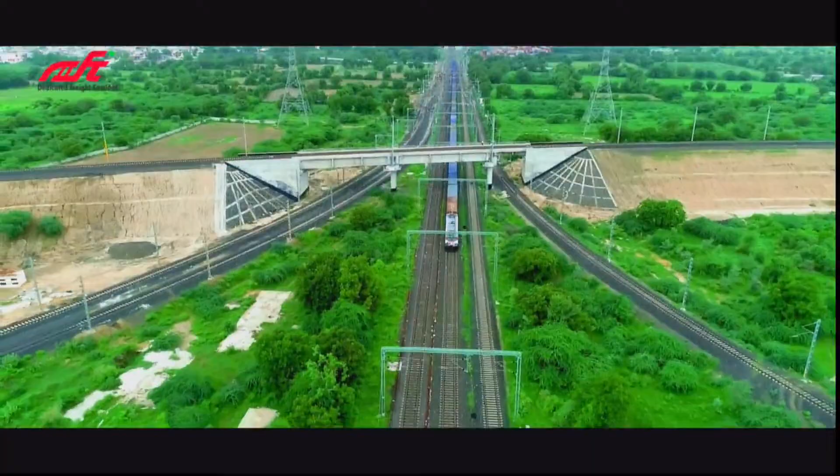For decades, India faced a tough choice: prioritize passenger trains or freight. With both sharing the same tracks, delays were inevitable, costs surged, and efficiency suffered, even though freight trains generated 67% of railway revenue while passenger trains accounted for just 33%. The Dedicated Freight Corridor is the answer.

Spanning 3,000 kilometers, it's designed for long, heavy haul trains, boosting capacity and slashing turnaround times. A first for Indian Railways on a fully electrified network, with double stack trains for higher loads and long haul trains carrying over 100 wagons, 10,000 tons in one trip. Efficiency reaches new heights. The Dedicated Freight Corridor is one of the iconic projects conceived post-independence.

The Western Dedicated Freight Corridor starts from Dadri and runs right up to JNPT. The Eastern Dedicated Freight Corridor starts from Ludhiana and goes right up to Sonnagar. After the commissioning of the whole section, that is 100% commissioning, our potential, our total utilization of this dedicated freight corridor will reach its maximum.

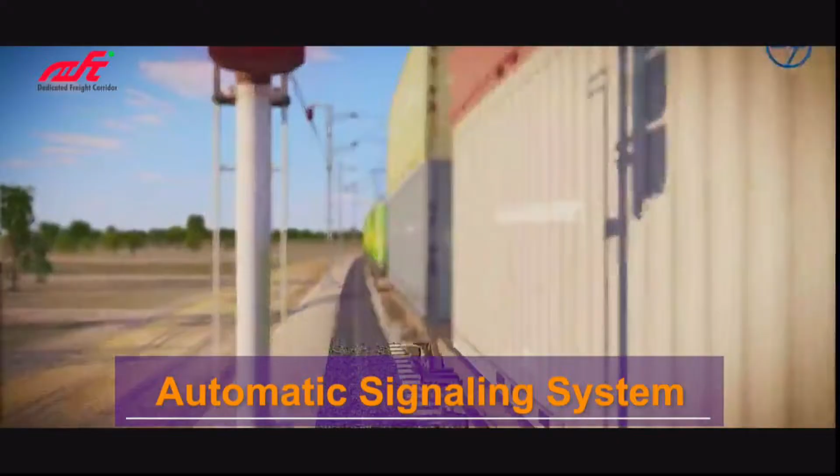High-speed, high-volume freight demands smarter maintenance. Instead of reacting to failures, DFCCIL predicts them using trackside sensors, AI analytics and real-time monitoring to keep the corridor safe, sustainable and reliable. An automatic signaling system optimizes train flow, while the 2x25 kilovolt power system supports heavier loads. Wheel impact load detectors spot faulty wheels early, preventing rail damage and ensuring smooth operations.

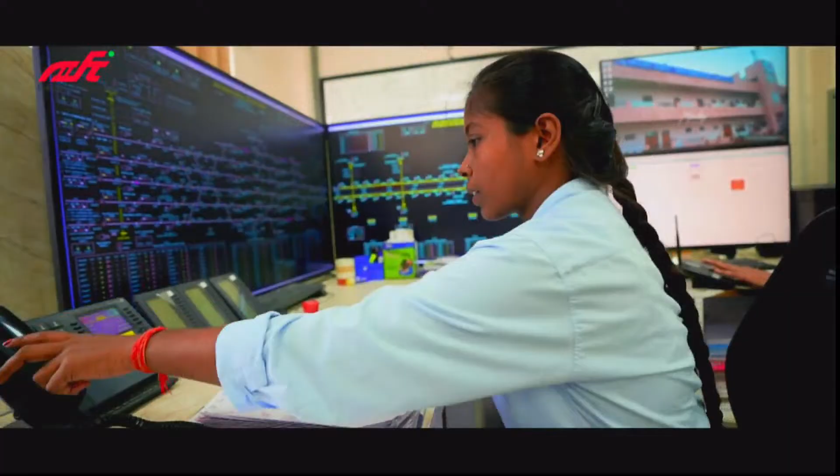Smart features include load, vibration and temperature sensors to detect rail stress, and acoustic sensors that hear faults before they are visible. AI models analyze data in real time, sending precise alerts to crews. DFCCIL's tech-driven approach includes hot box detectors to prevent axle failures, machine vision systems for automated defect detection, and automatic fault locators for quick repairs in overhead equipment.

Track recording cars use sensors to inspect tracks, instantly spotting wear, misalignment, or irregularities. This data keeps the track in perfect shape, ensuring safety and efficiency.

The Dedicated Freight Corridor is more than structure and speed. It's the backbone of India's economic growth. By connecting industries, empowering businesses, and moving the nation forward, DFCCIL is not just building tracks, it's building the future. As India strides towards Viksit Bharat 2047, the dedicated freight corridor stands as a testament to our ambition, strong, smart, and unstoppable. The journey has begun. The destination, a brighter, bolder India.

Absolutely wonderful.

After that amazing video, ladies and gentlemen, we'll quickly dive into the proceedings of the first technical session for today on the topic of Built to Last: Interface Design, Precision Welding and Fleet Intelligence. This session will spotlight innovations at the rail sleeper interface, the role of precision welding, and the engineering intelligence that supports long-term durability in heavy haul environments.

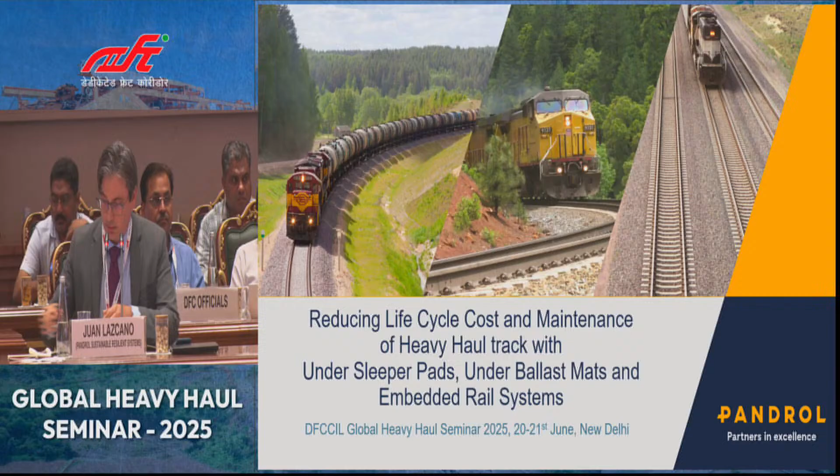So I'm coming here as Pandrol, where you can see we are a global company. We are partnered with main networks around the world. To summarize our vision, our aspiration is to contribute to the main objectives of networks around the world, looking at availability, safety, and being more than a supplier, an engineering partner. Our presence allows us, in the end, to share experience globally. When we look at Pandrol, we have several core businesses focused on fastenings and weldings, but there is this knowledge built around the track that also has branches leading to the specific systems we are going to discuss today, focused on track resilience.

One of the associated divisions that I'm personally more involved in at Pandrol is everything around track resilience. We believe that more and more, track resilience is a way to reduce life cycle cost and prolong the life of the track. This knowledge, built up through Pandrol's work in track, fastenings, weldings, and the return from our valued customers, brings specific know-how in seeing the track as a whole. It's crucial in track design not to look at just one side of the story, but to understand how all the components are interacting. This is what we can share with confidence, and we believe it is the value of our company.

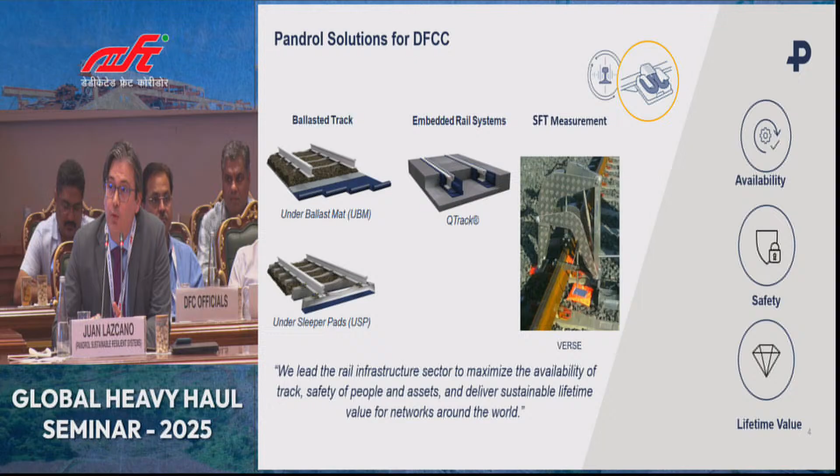Again, the keywords are going to be resilience, track design, and optimizing the track stiffness in a way that really reduces the life cycle cost.

So the first stop is under sleeper pads, which the best way to show it is graphically. What is the concept here? We are looking at basically placing an elastic element under the sleeper. This additional layer of resilience is going to be key for performance.

There is one root cause for many of the fantastic discussions we are having here today, which is that we are talking about track infrastructure getting hit by huge dynamic loading. These forces are affecting, degrading, and impacting all the elements of the track. So this is the core issue.

This is something that when you place this elastic element, you are directly influencing positively the load distribution. Again, when we think about the 400 kilonewton load axle, without USP, what happens when the rail impacts - you can see this graphically - the load distribution is really focused on a reduced number of sleepers. So you have a very high impact.

Impact on, let's say, 1, 2, 3 sleepers. When you actually increase the resilience, this load distribution enhances, and that peak stress that the rail seat is suffering gets really relieved and better distributed. Only that principle marks a huge difference that we need to take into account.

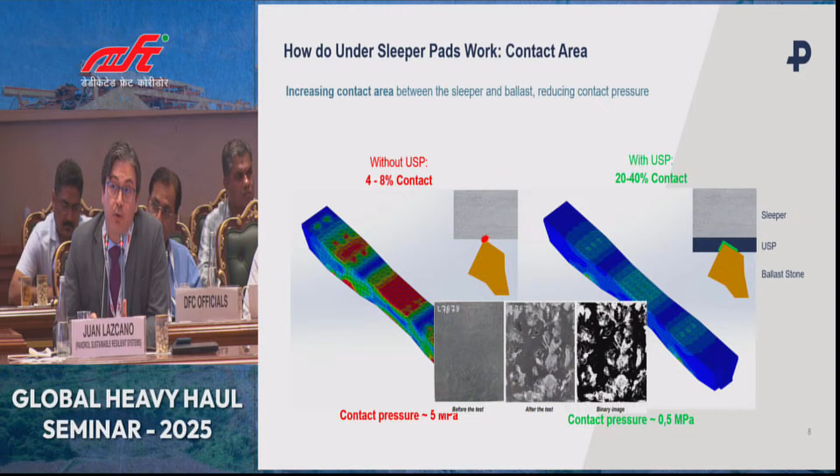But overall there is an agreement of a 20 to 40% contact area in many cases, depending also on the stiffness and elasticity of the USP.

Let's go quickly to the main benefits. When we look at under sleeper pads and a resilient element, it's going to help in the reduction of maintenance. Being an elastic element, it can help in very critical areas like bridges or tunnels, where there is a need to reduce the ballast layer thickness - it can be a way to compensate and really control the overall track stiffness.

By substituting this ballast, which is, let's remember, also an elastic element of the track. Transitions on design we'll take a look at later, and noise and vibration attenuation is also possible in heavy haul when you are nearby urban areas. It's also a need - maybe not primarily, but for critical sections - something to take into consideration.

At the end, these technologies, let's say they are relatively new in railway terms - 25, 30 years, so relatively new. A railway is a world of facts, accumulation, proven track records, but it's also already, after 30 years of the first references, which in our case were in Austria and elsewhere, there is a state-of-the-art position and very well-developed norms and case studies with specialist companies like we are present here today.

There is a foundation of everything that we do, which is a fantastic report from the International Union of Railways on USP, that after several test tracks, established the framework of the first positive values and benefits. These numbers you see are coming from that report.

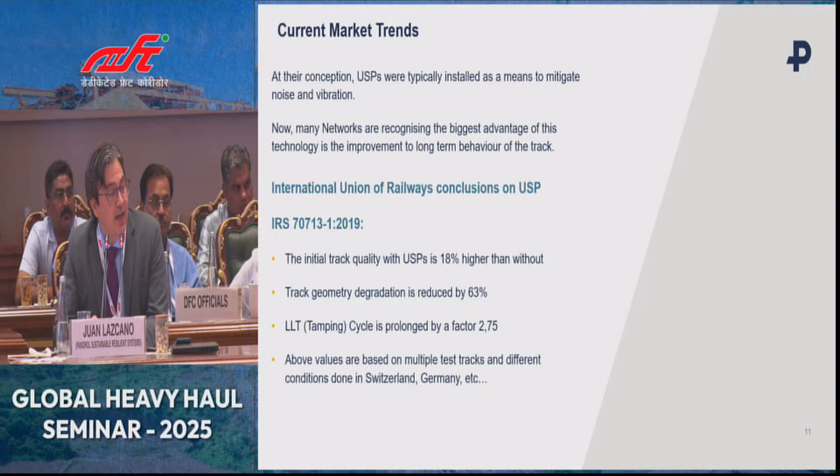In terms of reduction of tamping, track geometry degradation, and track quality overall, it's difficult to summarize and put values because this is very network-specific experience. Case studies are much more interesting, and it's not about fixing one number. It's about understanding every track and network needs to define the right USP.

That's the best approach. One of the foundation stones was this SBB Switzerland case, where the challenge was to find the right stiffness for the needs of the network. This is where you can see the difference between using USP, in this case an intermediate stiffness, versus sections without USP, and the increase in track settlement.

We have networks like in the case of Belgium that have been using this technology for 30 years now. It's recurrent - not just for critical sections, they use it recurrently because they see an accumulated benefit in maintenance reduction.

And also a positive impact on corrugation. The most valuable data is always with the networks, and this is where we want to always be close to learn - that's the best empirical way to approach this technology. The cases we are going to see are Belgium, Sweden, and US. Every pain point of the network can be addressed by having this overall view on the track.

Our approach from Pandrol is stiffness in the fastenings, what happens in the welding, and below the under-sleeper pad. We see the track as a whole.

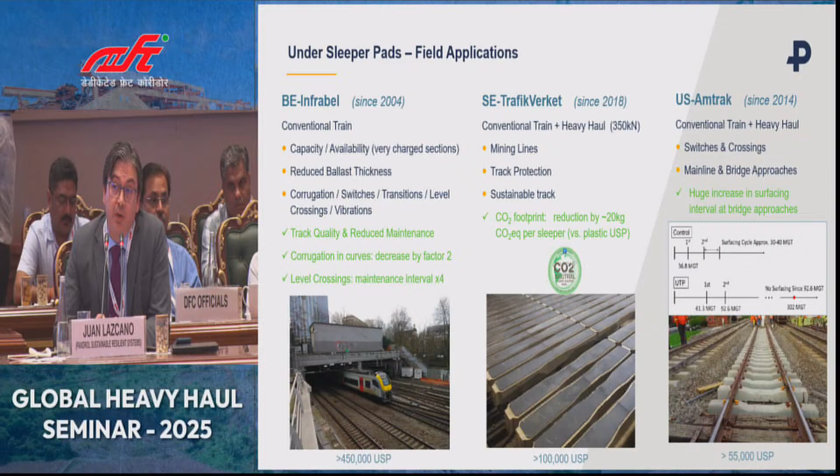In the case of Amtrak, in some critical areas, they saw a fantastic factor 6 reduction in tamping. And today, I think in the US, they are by far the most adopting - they are the pioneers of adopting this technology.

Australia's cases focus on ballast protection and the transition stiffness problem they have on bridges. There is one case in Brazil also, which we know is clear from IHHA - that the freight operations in Brazil, MRS, Rumo and Vale, have really been pioneers of this adoption for heavy haul, and it's one of the best references this technology can have.

Today, the state of the market is telling us quite clearly that the market is demanding track experts who are capable of understanding sustainability of the track - in the sense of prolonging the lifetime, and in the sense of being as green as possible.

But again, after 30 years, there are some initial conclusions. It's widely recognized by the International Union of Railways and the European norm for under-sleeper pads that there are several elastomers that can be used.

Today we see a trend that is mostly focusing on the best performing materials, which are typically the polyurethane and rubber-based solutions. In our case, we also use rubber for our technology.

This is a way to achieve the purpose of the elastomer, which has to be - and it's especially important for heavy haul - proven resistant. It really has to have an excellent performance in fatigue. So this is one of the reasons we are using this material. But again, it's about the system and the knowledge.

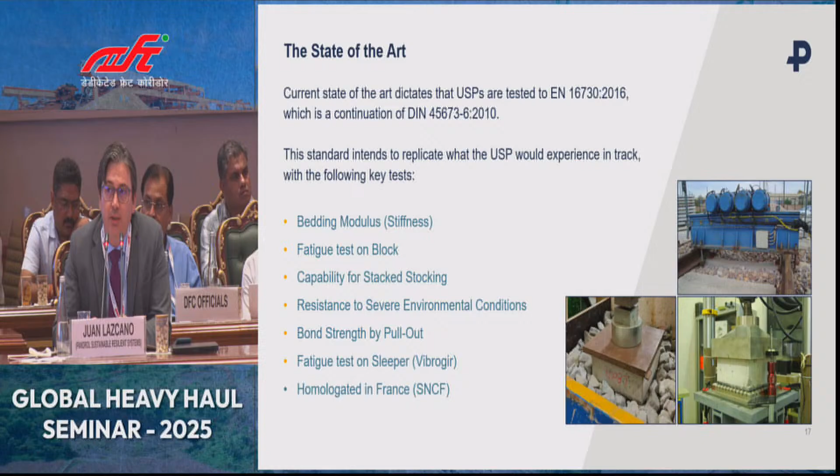But at the end of the day, if I need to choose one, I will always focus on one specific test for fatigue and durability, which is the one we needed to pass to get homologation in SNCF in France, the Vibrogir. Why do we always recommend this testing? Because it's the most conclusive and powerful way to simulate the torture, because I don't have any other word, that this under-sleeper pad is going to suffer during its lifetime.

This particular test, developed by SNCF and now accommodated in the EN standard, is a must for adoption, to be sure this system is going to pass the test of time. The result you see there is basically the setup, the sleeper equipped with the Vibrogir. The idea is to simulate up to 1,000 mega gross tons and see the variations, both physical and in terms of stiffness, to see how the material gives performance throughout its lifetime.

A very quick point on some investigations we are leading today. The group of engineers at Pandrol is also part of the CEN committee, in charge of redacting, updating and taking care of the EN standard. It's formed by specialized engineering companies and suppliers, and also the European networks are present there.

One of the challenges we see today, and I think this is a general problem, is we need to simplify reality in labs to understand how the system works, but sometimes we need to keep a good push to make sure the conditions of the lab are representative of what happens in the track.

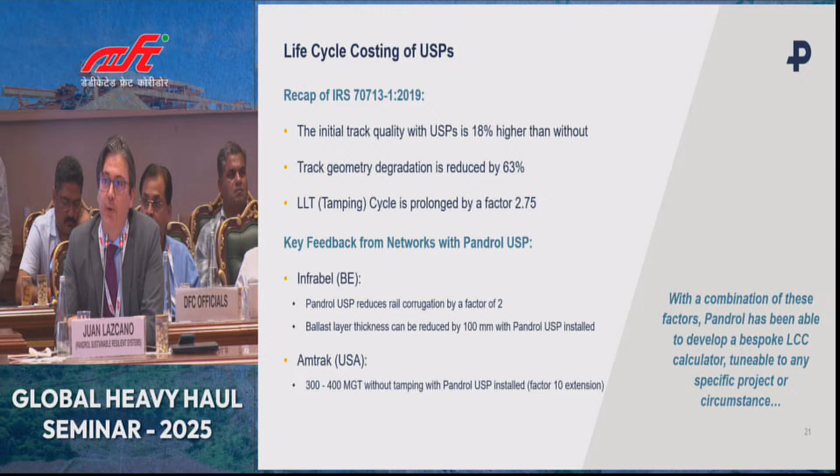Brief recap until now: again, 30 years of technology, a well-proven track record, different solutions, International Union of Railways Foundation, and a leading norm, the European norm, and very good feedback from customers around the world.

Today we are also trying to develop a different approach with some of our customers, where we really need to think like an asset manager. For that, briefly, there is this tool that we can also sit down with our customers to bespoke, and understand, after defining a USP, what is going to be the impact in the long term and the return on investment of introducing damping and savings in the long run. Again, this is a sophistication, but it's needed because today we are moving to smart asset management, and this is a technology that can contribute.

Essentially today I am taking your time to talk about resilience, track resilience. Track resilience means more longevity. In this sense, with a very similar working principle but different application, is the under-ballast mat, which in this case is going to increase the elasticity of the track. Of course, logically, again we are in track resilience with a better distribution of forces.

It's also going to help the overall substructure and structure of the track, but in this case by placing the mats below the ballast. This track protection is different, and we recommend it probably for cases more linked with transitions, noise and vibration, because it's more cost effective and can also be combined with USP.

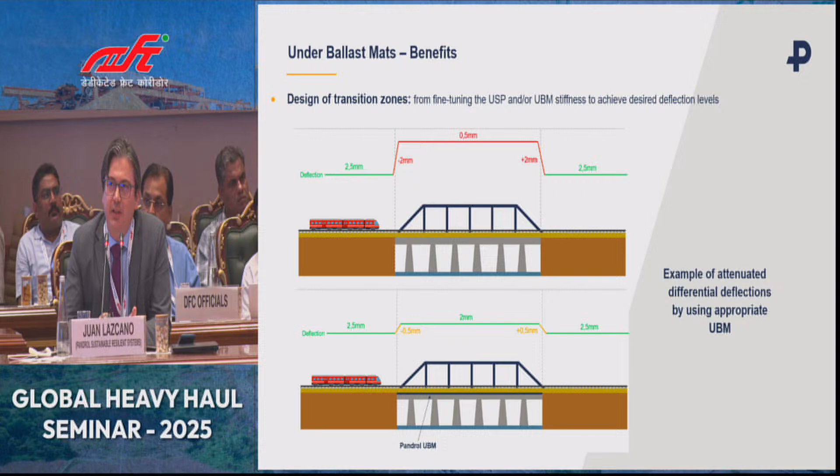A side benefit also linked with elasticity is noise and vibration, and essentially an under ballast mat is going to decouple the ballasted track from the surroundings. There are many cases where, by the expansion of networks, residential areas, hospitals, universities are very close to the track, and this ground-borne vibration needs to be tackled. So the most effective way is to place an under ballast mat and keep the structure isolated.

Different networks speak for this technology, and they use it for track protection, reduced ballast thickness, the case of Belgium. More heavy haul relevant will be the case of Etihad Rail in Emirates, where for more than 10 years now, they use it recurrently for ballast and substructure protection and track quality improvement overall. Also in Spain, there's a very typical combination of under ballast mat for high speed when it comes to tunnels and when entering urban areas, especially on the high speed connection. It's a very typical approach that their engineering team prescribes normally.

This last part is not so obvious at the beginning when we look at ERS for heavy haul, but it's something we see as a market trend growing more and more for the slab track parts. We need to look at some parts of the application here.

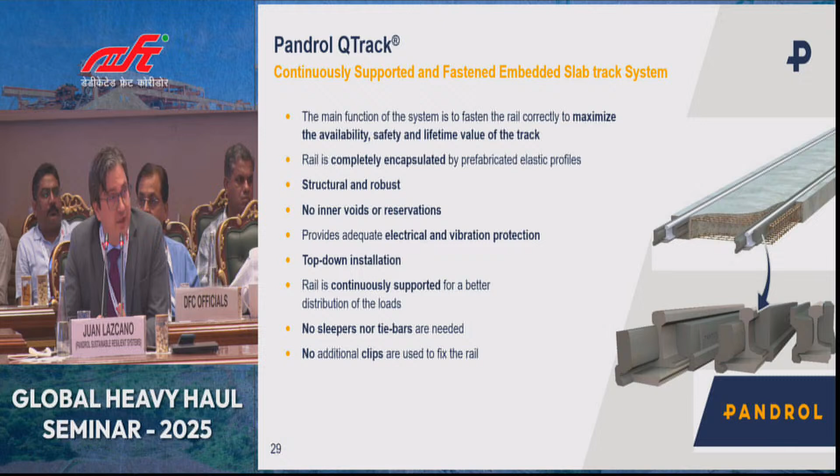For some critical sections, and we will see examples in a second, it has been proven as a fantastic choice. At the end, the concept is clear: you are going to encapsulate the rail. There are no sleepers or tie-bars. This whole setup is in itself a fastening system and is tested according to a fastening system.

The technical advantage here when it comes to track quality is quite simple. Versus a discrete resilient support, you develop a continuous resilient support. So as you can see, this differential deflection does not exist. The slab track is built to last. The whole idea and the whole point of this ERS is to get it maintenance-free.

Because the elastic rail deflection does not happen, the track is controlled longitudinally, vertically, and laterally. By doing that, again, we are looking here at specific critical areas. Even in the case of breaking, which is logically very rare, that continuous loading, that anchor is going to reduce even the gaps.

I'll give you an example. When this system was installed in Portugal, in Lisbon, even when there was a couple of rail breaks, it was so minimal that the train was still in operation. This is always due to the continuous control and the absence of differential deflection in the rail. This elastic deflection doesn't happen.

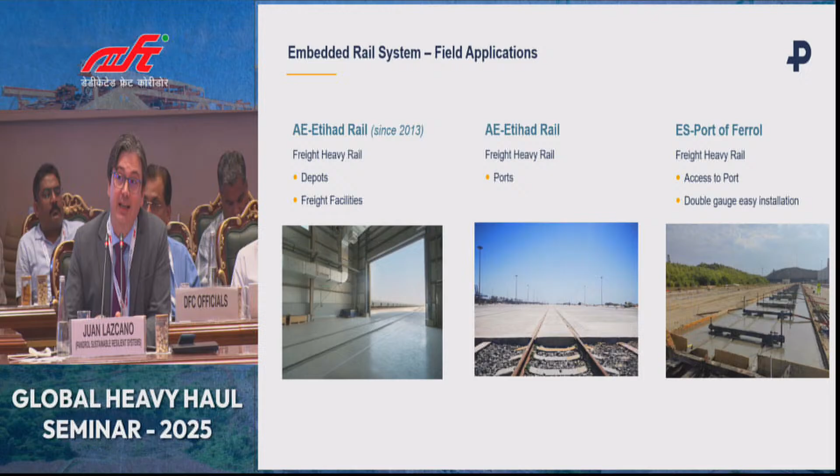As you can see, fields of application are going to be depots, freight facilities. To recap: we're talking about freight heavy haul in depots, in freight facilities, and very interesting, I think very relevant, for intermodal ports, we see more and more that rail connection is going with embedded rail. Again, it's clean, it's maintenance-free, and it allows machines and operations.

Almost right on time. I almost made it. I'm proud of myself, almost.

So, conclusions. USP, UBM, and ERS are focused on track quality. Resilience is the key. These systems have to resist the pass of time, and they are enabling freight and heavy haul today to maintain their targets in terms of availability, safety, and overall track quality. This is our value proposition. This is the experience we can share.

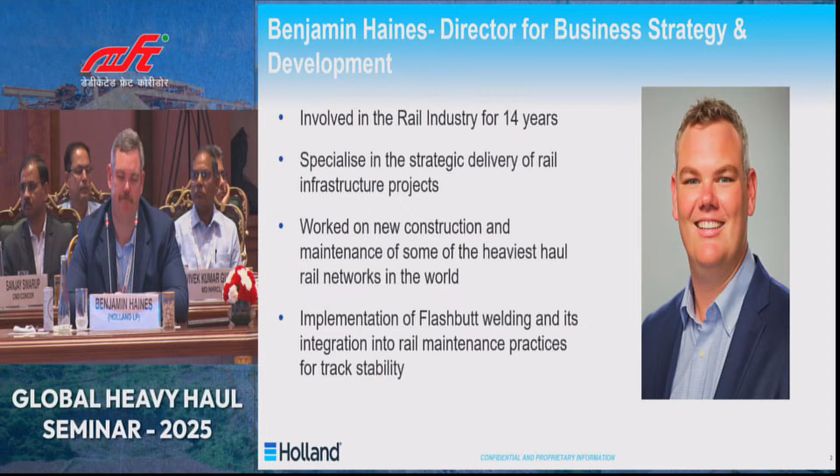So who are we as Holland? We are a rail technology and manufacturing company that delivers multidisciplinary contracting services. With over 50 years of experience in delivering flash butt welding services, we have the largest mobile fleet of flash butt welders in the world. We also design, build, refurbish and operate fixed welding facilities and their infrastructure for a number of our clients around the world.

As a rail technology company, we also have other divisions within our business, including our RMSS division, which has over 30 years of track geometry experience, utilising such equipment as our portable system, Argus 2.0, which you'll see in the photo, our UGMS locomotive mounted system, and also our specialist testing vehicles and products. In the last couple of years, we've been very happy to introduce what we call the HAMMER system, the Holland Automated Manganese Repair System, designed to repair manganese componentry and rail crossings.

In terms of a global footprint, our business has over 900 team members, all acting towards the same goal, to listen to our customers. As I mentioned, we have the largest global fleet of over 180 mobile welders, of which 3 are battery powered. It's a really exciting technology for us and goes into our core value of innovation, where we're looking for a more pure source of power that allows us to have greater finite control of weld inputs.

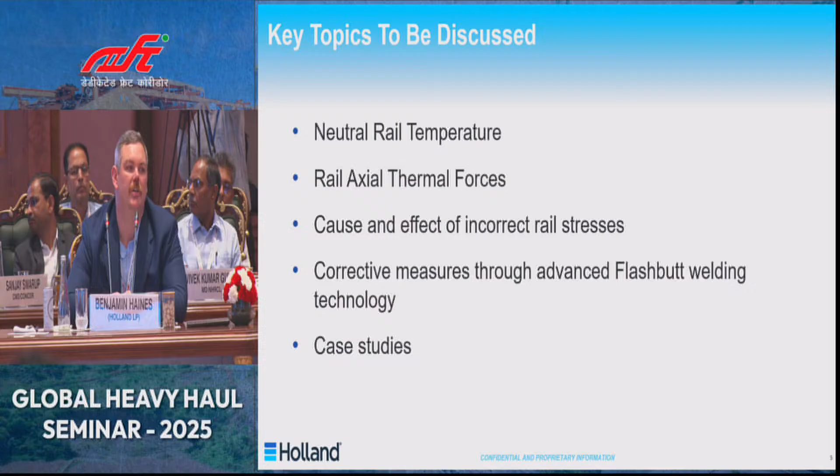So, neutral rail temperature. The neutral rail temperature serves as the baseline reference for managing axial thermal forces. It is a functional benchmark defined by design and altered through rail maintenance. It indicates the temperature at which a rail segment is free from internal longitudinal stresses. At its core, at NRT, the rail is in an equilibrium state, neither under compression nor tension.

It's important to note that rail temperature must be recorded using reliable methods, such as calibrated magnetised temperature gauges, and taken on the shaded side of the rail. So, understanding rail axial thermal forces in continuously welded rail.

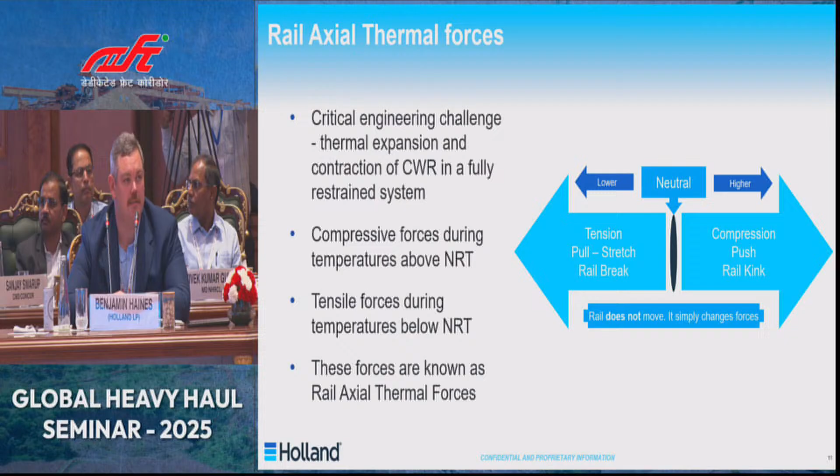This can result in a very large magnitude of rail axial thermal forces generated due to extreme lengths of the CWR, but also the rail stiffness itself. Merely a few degrees Celsius can generate tons of longitudinal force in any particular rail segment.

These forces don't just dissipate over time. They remain stored until released through physical intervention, such as cutting, de-stressing, and correct welding.

Cause and effect of incorrect rail stresses: the failure to establish and preserve the correct rail NRT can compromise the ultimate integrity of the CWR. This in turn leads to long-term operational hazards.

A big cause of this is welding and rail replacement activities often performed at incorrect rail temperatures, whereby the incorrect equipment is used that doesn't have the ability to apply a mechanical adjustment. An example of this would be closure welding significantly below the NRT.

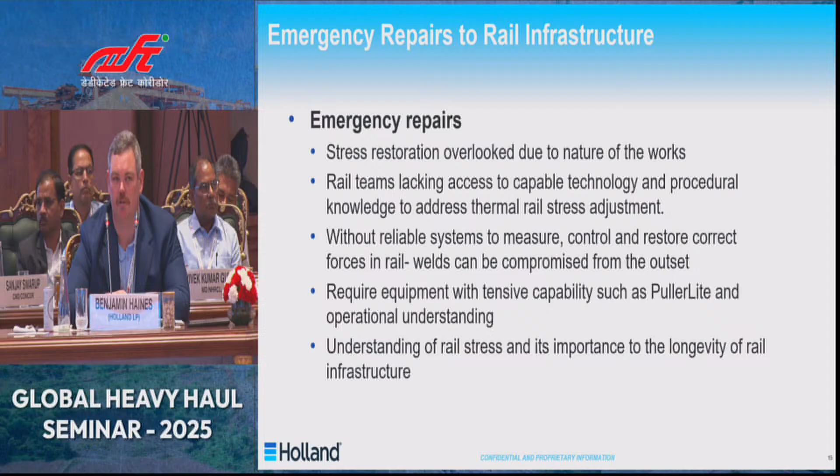We must also understand rail stress, and its importance in the longevity of rail infrastructure. Rail stress adjustment campaigns are another time where rail stresses can unfortunately not be corrected. It is important that correct procedures are used to adjust the rail to the desired NRT, and that rail infrastructure managers clearly indicate how they wish to manage this.

Approved methods must be verifiable, including with intelligent technology such as Holland's IntelliWeld system. Confirmation of equalisation of rail stresses throughout a rail module is imperative to know that the works being done restore thermal stresses to where they need to be.

Once again, correct equipment with repeatability and transparent reporting is of the utmost importance. You can see a picture of some of our technology, the PullerLite, whereby we're measuring the rail gap and also using a reference point system to measure post-tension.

Now, something that's often forgotten is weld quality when it comes to stress management. Weld quality is vital to the effectiveness of rail stress restoration. A closure weld must be able to withstand the full magnitude of longitudinal forces that are applied. Failure to replicate the mechanical strength and ductility of the parent rail results in the first point of failure under thermal forces. If we think about CWR, welds are often the weakest part of the rail, and there are a number of welds within any network.

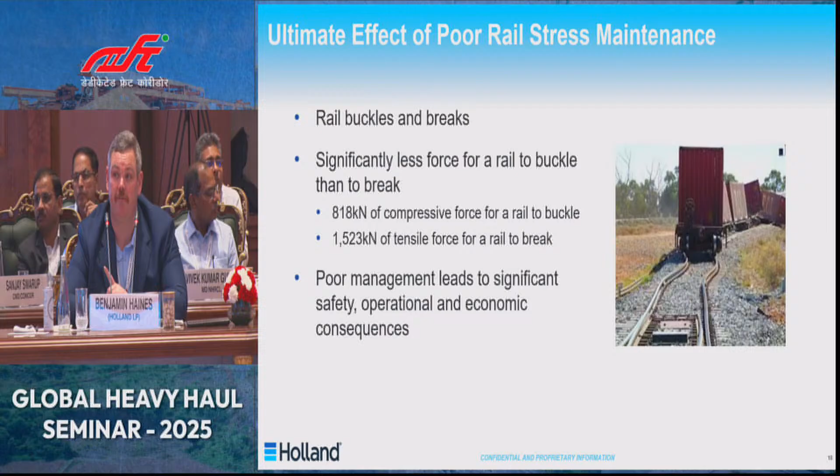Now, of note, from studies that we've conducted, it takes significantly less force for a rail to buckle than to break, with approximately 818 kilonewtons of compressive force for a rail to buckle versus, say, 1,523 kilonewtons of tensile force for a rail to break. This, of course, has a number of other determining factors in regard to the rail infrastructure itself, such as ballast quality, sleeper selection, and any other forces in play. But ultimately, poor management leads to significant safety, operational, and economic consequences.

So corrective measures through advanced flash butt welding technology. And it's important to note that this has come about through direct partnerships with our customers. Ultimately, Holland sets the benchmark in rail stress management.

Through purpose-built equipment, two key parts of our equipment is the IntelliWeld operating system, which we originally designed in 2015, and then once again improved in 2018, and so we're now running the 2.0 system, and the PullerLite. So the IntelliWeld system is that silver box that you can see in the top picture, and the PullerLite is that yellow frame. When we design this, it's about ensuring that we design the correct equipment that has the capability and functionality to perform both under new and existing operational procedures throughout anywhere in the world.

A core design philosophy for us is stress transparency, weld integrity, and operational flexibility. What is also important is taking our knowledge of over 50 years of welding and applying that training and understanding of the equipment and the methodologies.

I often use an example that there is no point in buying a Ferrari if you're not going to use it like a Ferrari. Ultimately, if you're just going down to the shops and not going to put the foot down, you might as well buy a cheaper option.

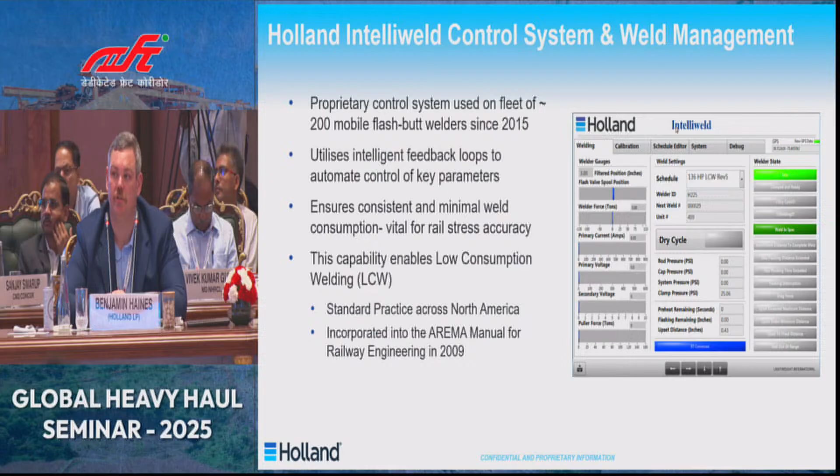Now, low consumption welding was brought about by working with our customers, and it is a strategic advantage for in-track closure welding. It applies a different philosophy in terms of rail stresses. Rather than going back to a stress to a desired NRT, we can take a principle whereby we at least want to ensure that we maintain a tensile state in the rail.

When paired with the PullerLite, it enables full restoration of rail stress, but also eliminates the need to unfasten unnecessary long lengths of rail due to its minimum consumption. This in turn reduces altering rail stresses outside of the weld zone and surrounding work activities. Our goal and objective is to reduce the amount that we interfere with the existing rail infrastructure. Ultimately, this disruption to rail infrastructure also reduces the total workforce exposure, providing a safer weld for our crews.

Now, it's a transparent system that delivers intelligent verification as well. Weld certificates for verification of the welding inputs are produced automatically for every weld. But what we do is we separate the weld graphs from the tensioning system as well, so two separate graphs are done. What this allows is our customers to clearly visualise the tensioning that was used during the

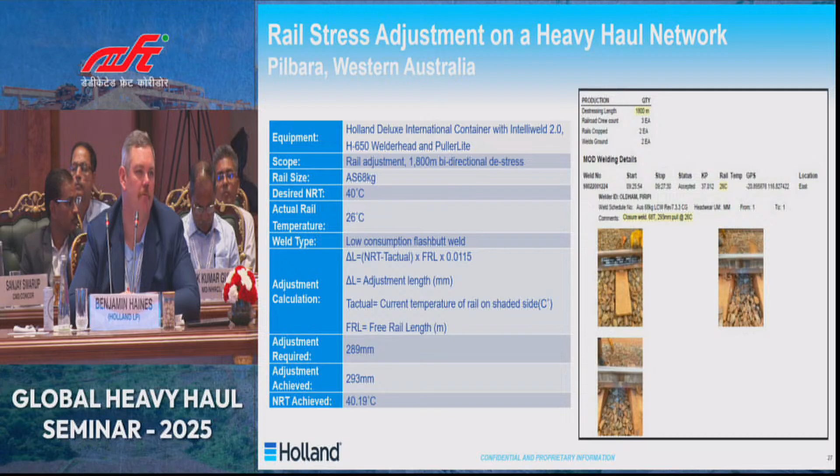So I want to leave with this. We are a rail technology company that is a supplier to you. Our objective is to understand what your problems are and design things that can solve those problems. We look forward to understanding about the Indian Railways and how we can further provide our assistance that sees mutually beneficial outcomes.

I encourage any questions. I certainly hope I can answer them, but if not, I will refer to our team in the States. And whether there be questions about flash butt welding or the cricket, I welcome the whole lot. Thank you very much for having me.

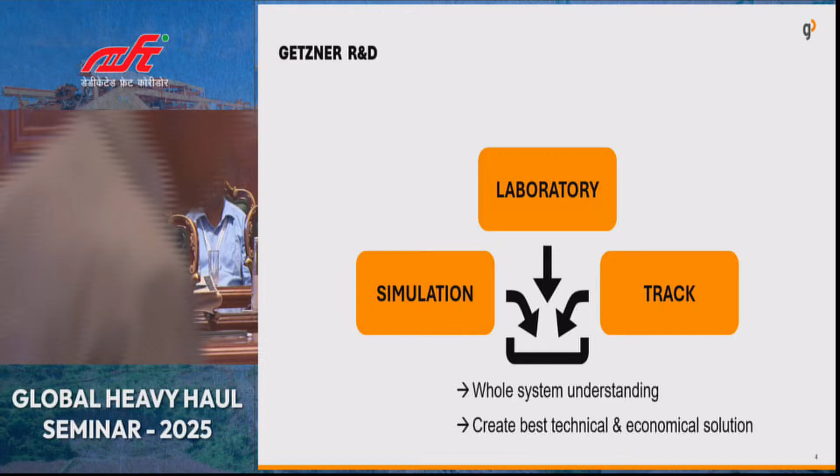As I said, we are not only a component manufacturer, we are a solution provider, and therefore we have a lot of R&D going on at Getzner. We have three areas in the R&D department. We are able to run simulations, mainly finite element analysis and multi-body simulations. We carry out all of these in-house, but we also have external partners when needed. We have our own laboratory where we carry out fatigue tests and everything required by the standards in-house. We are also able to instrument the track when required by a customer, with experts who work with pressure sensors, strain gauges, and other instrumentation equipment to verify the performance of our products on the track. So that's the Getzner R&D framework.

So today we are talking mainly about heavy haul, and heavy haul lines have very special requirements because this is a very special environment. According to the International Heavy Haul Association, we have three criteria: companies which operate regularly trains with axle loads higher than 25 tons per axle, trains with masses greater than 5,000 tons, and annual transportation over 20 MGTs. If you meet two of those three criteria, that means you are a heavy haul operator.

This special environment, with such high loads, high axle load, and longer trains, ultimately results in higher stress to the track. As an operator and infrastructure manager, what you want from the track is higher availability, less downtime, and of course, safety.

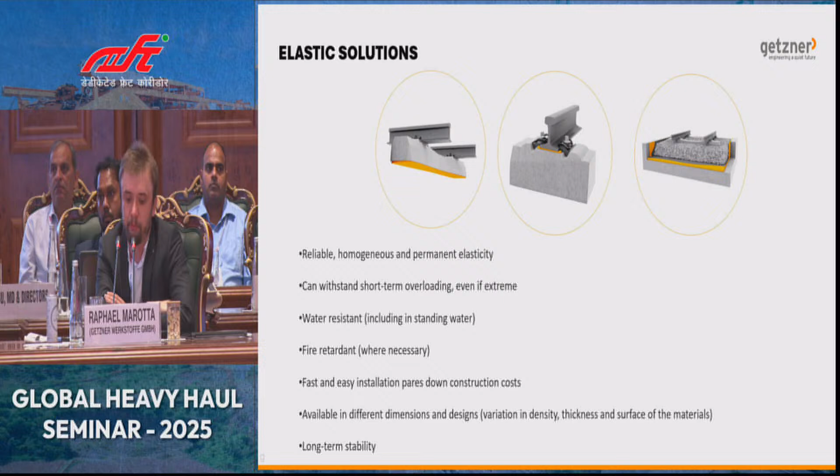As I mentioned previously, those are the products that we offer for heavy haul systems. We have the under sleeper pads—this is the first picture from left to right—the elastic element that goes between the bottom of the sleeper and the top of the ballast. We also have rail pads, between the top of the concrete sleeper and the base of the rail. And we have under ballast mats, applied in special situations, specifically on transition zones, for example between the open track and bridges.

These products have some special characteristics. They are reliable, homogeneous, and offer permanent elasticity over time. They can withstand short-term overloading, even if extreme. They are water resistant, fire retardant—which might be important in some special situations—and they have fast and easy installation.

We were talking two slides before about higher loads, higher axle loads, longer trains. In such a harsh system, if the ballast is not well protected or maintained, it becomes the weakest link for the infrastructure manager or railway operator. In the next slides, we have some examples of very common defects you may find on your track, especially in the areas subjected to higher stress.

This is a white spot. You encounter this frequently in the transition areas, I mean the stiffness transition areas from open track to stiffer structures like bridges and tunnels. This difference in stiffness ultimately results in higher vertical loads, so you may encounter this kind of defect on your track, especially in these areas.

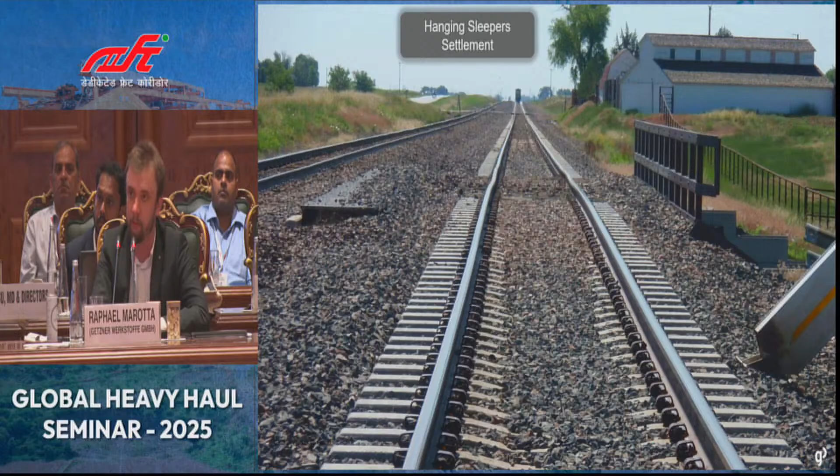Another example, again in a transition zone where you have higher loads and higher impacts, is hanging sleepers. When the sleeper is hanging, once the train runs over it, it causes even higher impacts, and this also causes the crushed ballast that we saw in the previous slide. I'm sure you're all familiar with these defects, but what's interesting is how elasticity can provide the system with more resilience, and therefore you can avoid this kind of problem.

This is another type of defect—a concrete sleeper with a crack right on the center. This is also very common, especially when you don't have the right support at the ends of these sleepers. It also occurs if you don't have superstructure protection and proper maintenance, and on a daily basis it's really hard to manage this kind of situation.

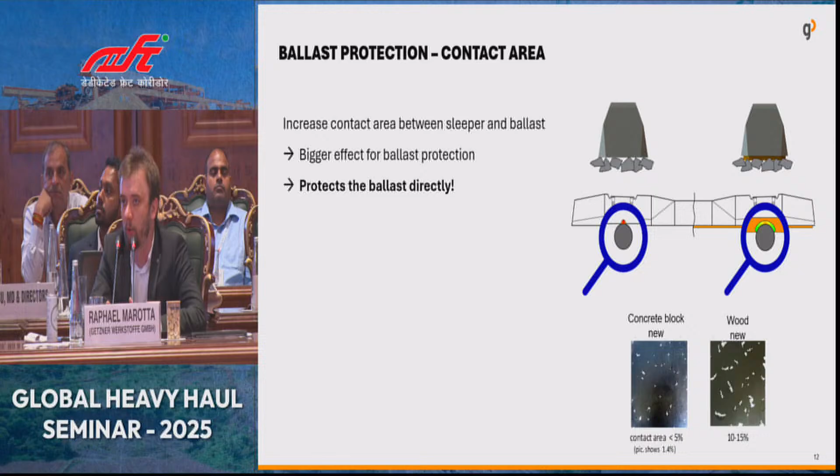Speaking of our products, I'm talking about the main characteristics that allow for better superstructure protection. Ultimately, all the elastic elements aim to provide a greater contact area. With a greater contact area, you reduce the stress, and by reducing the stress, you reduce track failures and increase the availability of the track. On the left part of this sleeper, the unpadded sleeper, you see the contact area between the sleeper and the ballast is very little. On the right hand, you see the increased contact area, which is only possible with an elastoplastic element. That's the principle through which our products work, and that's how we provide superstructure protection.

This is a real-world example on an unpadded sleeper and a padded sleeper. You can see clearly how the ballast stones penetrate at the bottom of the unpadded sleeper, and this causes higher stress. I will show you in the next slide some more real-world examples.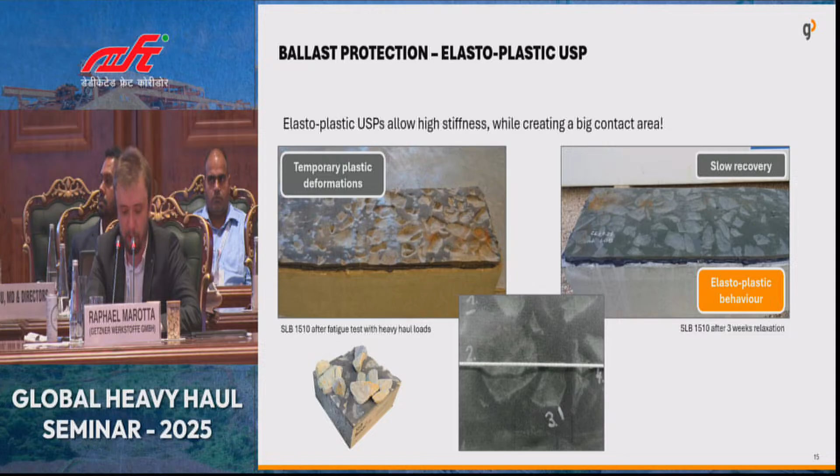Those are some lab tests carried out in-house, but you also find similar examples in academic papers, with many similar tests produced by universities. We have a comparison of polyurethane under sleeper pads, EVA, and elastoplastic polyurethane. What we show here is that you can increase the contact area by, in this case, around 80%, 76%. These are the results we measured with our sensors. This is not theoretical, this is our real-world measurements.

Then we start talking about some case studies. The first one was produced by Vale, with real measurements on the track. On the y-axis you see the standard deviation measurements over different runs, over I think 4 years of measurements at Vale. Vale transports annually 280 MGTs, so over 4 years we're talking roughly about 1,200 MGTs. At the center of this graph you see a track section equipped with under sleeper pads, and on the left and right sides you see the sections which were not equipped with under sleeper pads. We reduced the track degradation in this case by nearly 100% when comparing the unpadded sections with the padded sections.

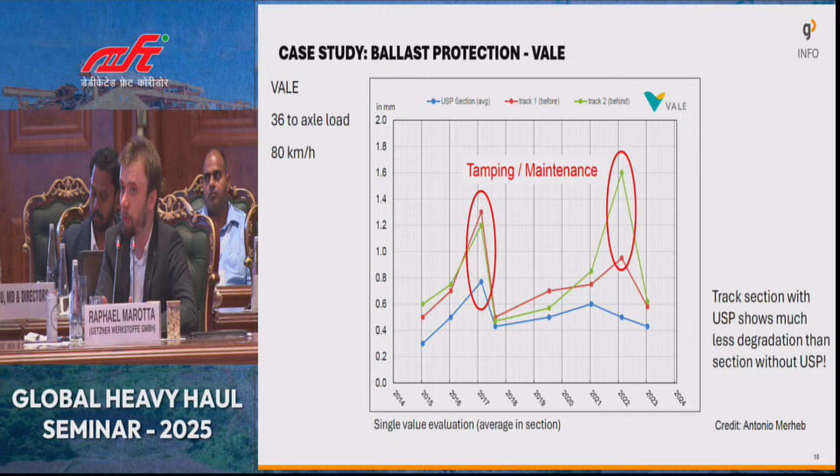Again, this is a track section at Vale, showing track degradation over time and the moment when Vale carried out tamping. We see clearly that the section shown by the blue line, equipped with under sleeper pads, performs way better than the other two that were not equipped with under sleeper pads. The degradation rate was reduced, as I said, by nearly 100% in this case. That means for the infrastructure manager, fewer track geometry defects, less time needed for unplanned maintenance, and therefore higher availability.

Another real-world example is in China, on the Daqin Railway. This operates with 25 tons per axle, and the annual transport is 450 MGTs. We equipped the track again with under sleeper pads in this section. Before that, they had many problems, especially with crushed ballast and broken fasteners, and they decided to go for this solution, aiming for higher availability and less downtime, especially on such a busy line. You don't really have time to carry out maintenance as frequently as you may in tracks where the demand is not that high.

We know that joints usually are a huge problem because of the discontinuity associated with the different stiffness in that area. You may end up with higher maintenance, needing to maintain the joint more frequently compared to the open track. So we see in this specific example that our products deliver special benefits when it comes to joints.

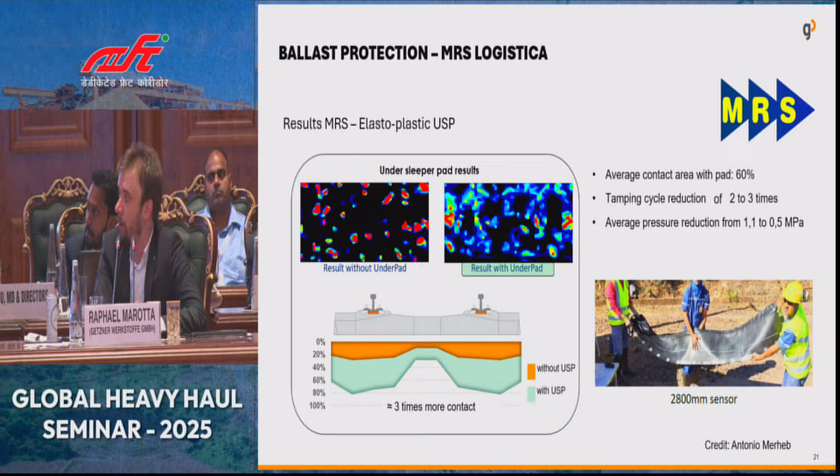megapascals. And then we come to the most important benefit of elasticity. This is the LCC analysis. This is a very important tool when it comes to track maintenance strategy because it takes into account not only the CapEx but also the OpEx - the total cost of ownership of the track, meaning the cost to build the track plus the costs to maintain it over a given period of time.

So this would be a baseline scenario. Depending on your strategy, you may decide to build now and fix later. Using the LCC analysis over a given period of time, this strategy may result in non-optimal LCC, let's put it this way. But when you decide to go for more preventive maintenance, or implement elasticity to optimize the system, although you have investment cost at the beginning to equip the sleeper with undersleeper pads, over a given period of time, because of reduced maintenance and costs associated with track downtime and availability, you will end up with an optimized LCC. You can optimize the LCC by 30% when equipping the track with undersleeper pads.

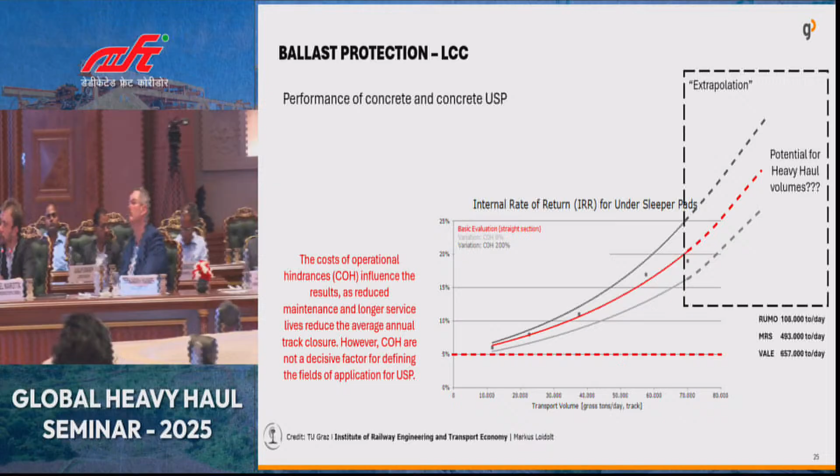This is also an LCC analysis. What is important to notice in this graph is that especially when you increase the annual or daily transportation, the more you transport, the more important is the role of elasticity for your track.

And then the last example I brought for today's presentation is track design optimization. We've been discussing how elasticity can increase the contact area and therefore reduce the stress the track is subjected to. In some specific situations, this might be very important, especially when building the tracks.

This is a study carried out in Austria. Different ballast stones were analyzed. We had premium ballasts like basalt and granite, and other types of stones like dunite and calcite.

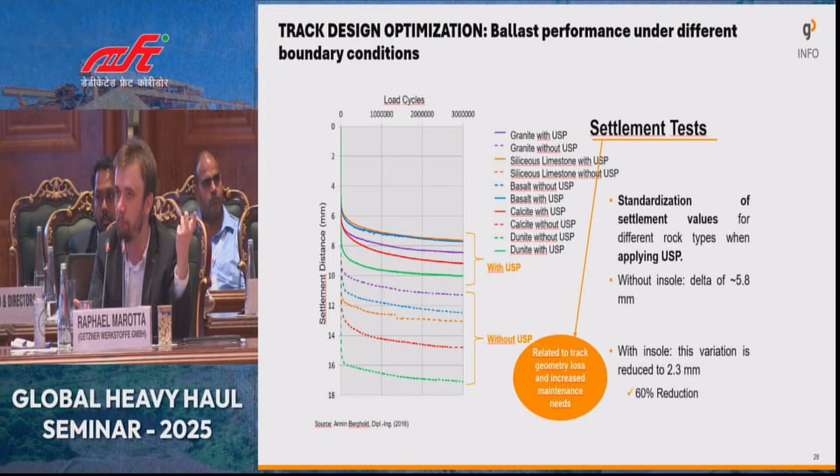Settlement tests were carried out at the laboratory with undersleeper pads and without. What we see is that even non-premium ballast behaves very well when the track is equipped with undersleeper pads because of the stress reductions. You may get the same results as using granite when building your track. This also allows for design optimization - you can even build the track with 20 centimeters of ballast instead of 30. This might be important if you don't have a quarry close to the railroad or don't have premium ballast available in your country.

This is a conclusion. One last key characteristic of our products is that they can also improve track lateral resistance, which might be important especially for track buckling prevention. This type of defect is also important because it's really hard to predict - even if you carry out measurements frequently on your track, it's not easy to predict when track buckling will happen. So you can use elasticity to prevent this kind of incident.

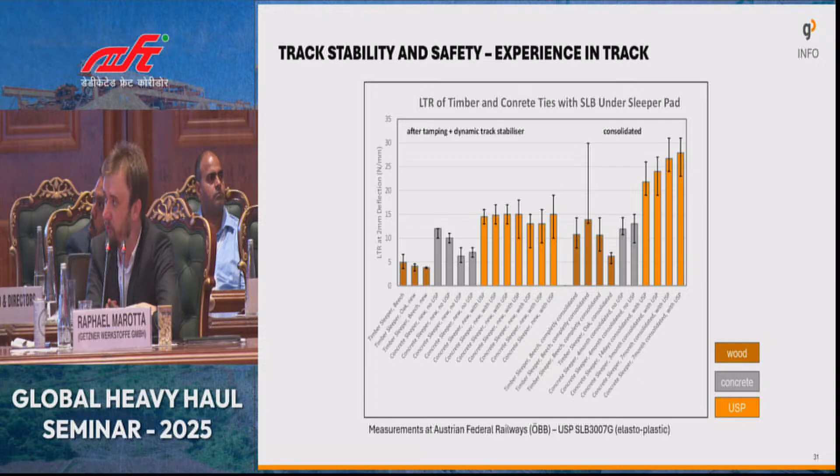That's a real-world example when we compare wooden sleepers with unpadded concrete sleepers and padded concrete sleepers, showing how we can increase lateral resistance with undersleeper pads. Those laboratory tests agree pretty well with the real-world examples. And this is the conclusion of today's presentation.

Elastic components can reduce maintenance needs. Field studies in Brazil, China, and elsewhere showed that undersleeper pads and UBMs can reduce track settlement by 65%, extending maintenance intervals by up to 2.75 times or more. It also allows for lower capex through optimized design.

This is the last example I brought for today's presentation. Elastic layers enable the reduction of ballast thickness and the use of non-premium ballast. We have validated performance in heavy haul conditions, with benefits confirmed under axle loads ranging from 25 to 32.5 tons, and traffic levels up to 450 MGT annually. Improved infrastructure resilience and elasticity increase the uniformity of support, reduce dynamic stress, and minimize long-term degradation of the track superstructure.

Last but not least, we have proven track availability gains. Case studies report enhanced track geometry stability and tamping reductions in high degradation zones, even under extreme traffic demands. So, thank you.

In that context, I will draw from the wisdom of the discussions that preceded my session, wherein we said that to implement AI, ML, and cutting-edge technologies, we need to identify the realistic problems that railways face, and try to solve those problems using cutting-edge technologies. Today's presentation is a step towards that.

What I'm going to talk about is, yesterday we saw how tamping machines are heavily used in automated and semi-automated fashion for track maintenance. Today we will talk about how such a fleet of machines can be intelligently used to do predictive maintenance.

The first thing we need to identify is that such futuristic technologies have to have a foundation of what we want to create out of the value we derive from the data. As we also discussed yesterday, we want to move towards efficiency, productivity, and availability.

This is where we encash the technology implemented from a predictive point of view, and that is where my presentation would try to focus. So what we want to start with is how do we capture the end-to-end process. These are the blocks which signify what needs to be done for you to take a step towards predictive maintenance.

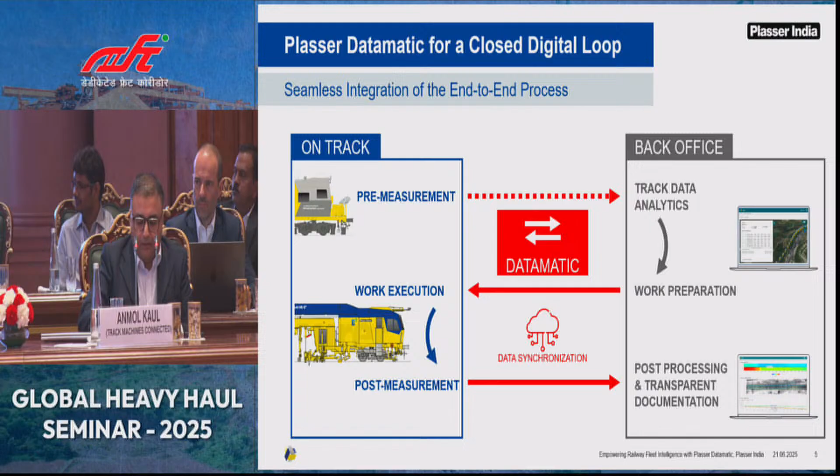Now, once we deep dive into this, we come to the two critical elements of this technology: one is called Machine Data Connect, and one is called Machine Condition Observer. Machine Data Connect is basically an IIoT device present in the machines, and the Machine Condition Observer is a web portal based analysis tool where you get insights into what has happened and how the next steps have to be properly planned.

So as I said, you have a device on the machines which records not only what was done and how it was done, but also in real time you can see the data that an operator would typically see when operating the machine. That is how you come to the first step of realizing the data in a live sense.

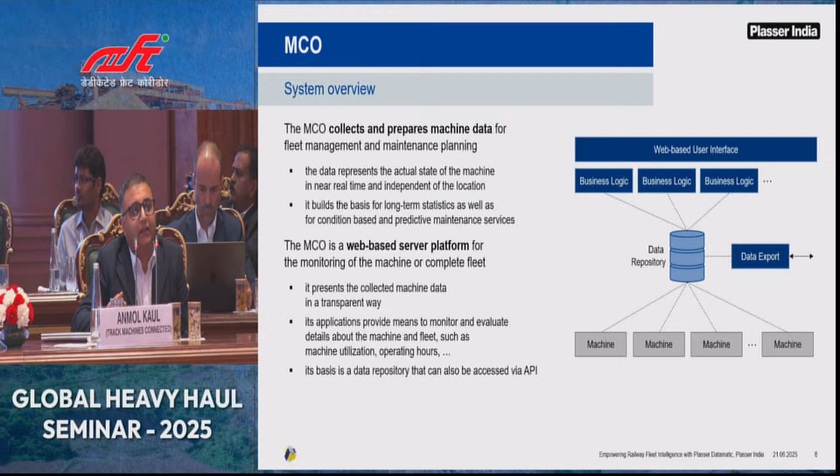How do we do that? Basically, think about a problem where you have different fleets of machines. All of these machines start talking to a centralized repository where all this data is collected, and then the next level of automation kicks in. What happens next is all of this data comes to a portal where you're storing the data, analyzing the data.

Now that you have the data, we move to the next step, which is how do I use this to get to the stage of predictive maintenance? That's where you have the machine condition observer, where you have the list of all the machines in your fleet. You can in real time see the position and tracking of the machines, and build a personalized way of looking at the data. But this is just the first step.

What you now have is the ability to do geofencing, which means the machine will tell you it's in a certain zone without you even monitoring that. So you are now moving towards the machine talking to you.

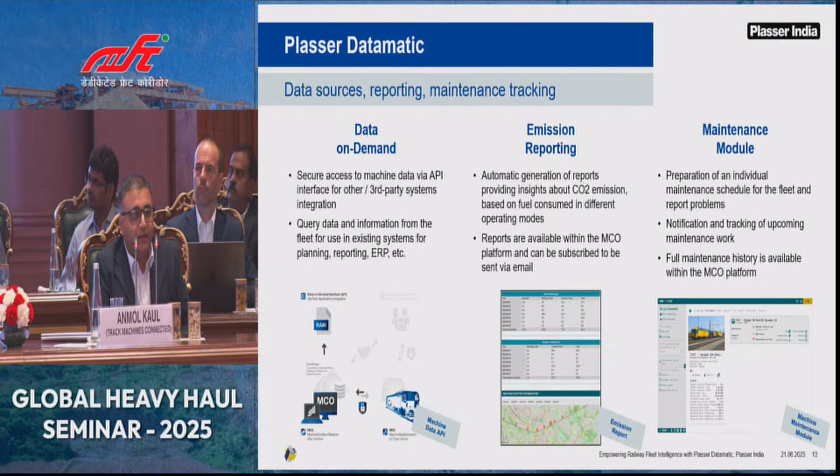Machines will start talking to you about when they have exceeded something which by design was not to be exceeded, so you have notifications coming in. Now we are moving into a zone where you are not actively maintaining the machine. The machine itself is telling you that maybe these parameters or systems need to be looked into or need some maintenance. You would be able to better plan, for example if there are frequent travels with less work involved, and this kind of analytics would be available to you.

That brings us to what I should now analyze. Now that I have a fleet, I know how the fleet is doing, how each machine is doing. I can walk back in time to compare how I was doing last year for a specific season, track, region, or location, and how I am doing now. This gives me a base for doing predictive analytics and for giving me actionable intelligence, and that's where it opens doors to advanced data analytics.

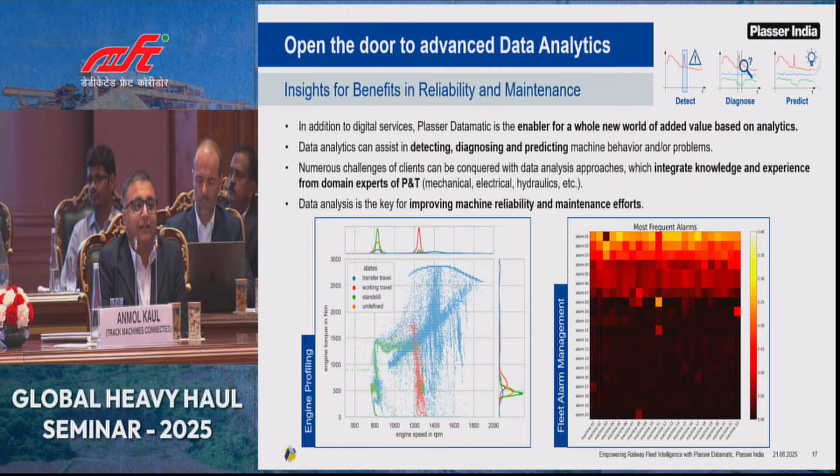It's important not only to have all this data, but also that this data gives you actionable items. What you see on the screen is the machine telling you, considering this is the record of how it has been operating, these are the things where probably it's giving you more alarms. This is how your engine or traction has been performing, and if this is the reason you're seeing this alarm, this is where you need to intervene before the situation happens. That's how we systematically move from doing preventive maintenance to predictive maintenance.

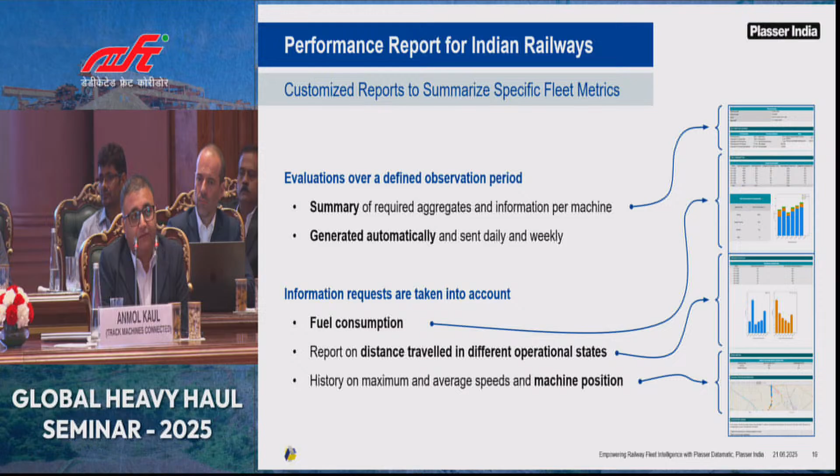This is an example of what we have done with the Indian Railways, wherein you are able to see not only the summary or aggregation of the data of the machines or the fleet that has been operating, but also specific inputs where I would probably like more intelligence, so that those specific customizations are also now possible with this data.

And ultimately, we want to monitor the quality of the work that was done. So the machine now monitors itself with respect to how the work was done, and specifically tells you if there are any spots which have been missed from a quality point of view. With real-time locations, you would be able to provide, within a particular time span, what the machine has been doing and how it has been performing.

And as we were discussing, these health checks can become very elaborate with respect to analysis, wherein you can also do statistical analysis based on how these health checks have propped up onto the machine, and derive insights, which are mathematical insights, out of that.

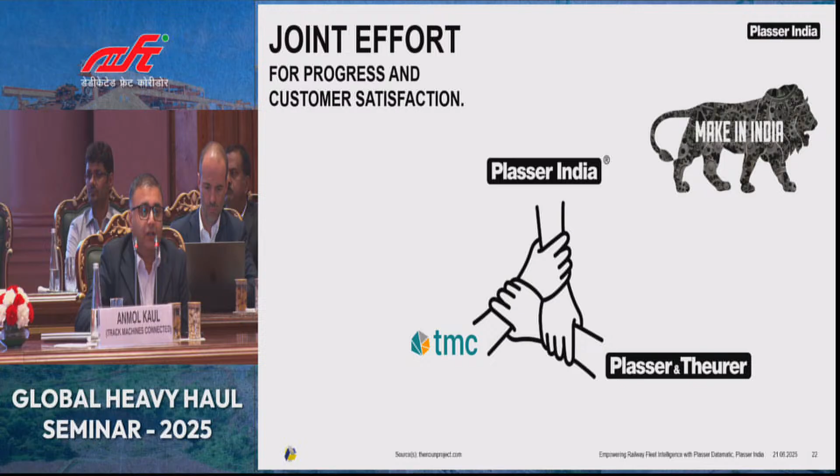So I would like to also stress the fact that whatever analytics and other features we saw, it is a joint effort with the focus on Make in India. We have a team here which helps us realize all these things in collaboration between Plasser India, Plasser & Theurer, and the TMC. So a really good example of how you ensure customer satisfaction by correlating whatever is the best available across the globe and bringing it to India.

I'm sure you would be having more questions. Feel free to please reach out to me, and I would definitely like to get back to you with the answers. But thanks a lot.

Thank you, Mr. Anmol. These papers are very useful for the maintenance and reducing the life cycle cost for the heavy haul system, which has created a lot of interest in the seminar, in the meeting. And so we have received so many questions.

First: under sleeper pads are good innovative solutions. At Monash IRT, we have developed circular economical next generation composite plastic sleepers working with Pandrol. Have you done any research with USP to use recycled rubber? This is from Professor Ravitharan.

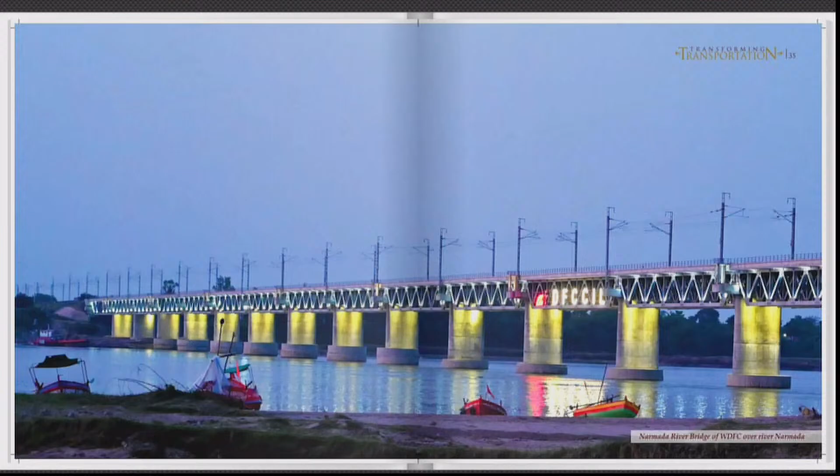Ladies and gentlemen, there are special coffee table books signed by the MD, Dedicated Freight Corridor, Shri Praveen Kumar ji, which have been placed on the tables of all our esteemed speakers. This is about the journey of DFC. Though some speakers have already been presented with these books in the office, for the others we have placed them at the tables. So these coffee table books about the journey of DFC have been placed on the tables of all our esteemed speakers. We can also see a digital copy right here on the screen, visible to all of us. This is a very special gesture from Shri Praveen Kumar ji, signed by him and presented to all our esteemed speakers. Thank you very much.

Welcome back after the refreshing and rejuvenating tea break that all of us really enjoyed. Ladies and gentlemen, we are diving into the final technical session on the topic of heavy haul rail infrastructure, performance, reliability, and sustainability. This is going to be the final technical session of this remarkable seminar. This session features practical experiences from two of India's most progressive infrastructure organizations. To guide this important discussion, may I please request the moderator, Shri Mahesh Gupta ji, a respected expert in rail infrastructure and life cycle management, to kindly lead the session, introduce the speakers, and begin with the deliberations. Very quickly, over to you, sir.

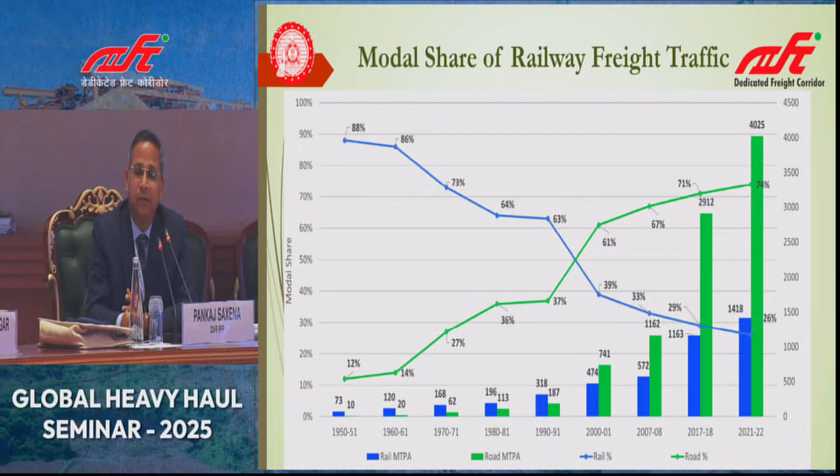This is about DFCCIL. It was conceived in 2006, and all the contracts were mostly awarded between 2014 and 2017-18, and we have started operation since 2020, late 2020 or early 2021.

I was talking to my colleague, Mr. Ravi from Monash University, that when I was 4 years old, heavy haul operation was started in Australia. And now, when the DFC is 4 years old, we are breaking all sorts of records, national and international, in freight operation in the country.

You will be surprised to know that already our GTKM per year, the gross ton per year carried on DFCCIL track, is the highest amongst all the zonal railways of the country. Second position, a distant second, is East Coast Railway.

This is a special purpose vehicle, and we have full mandate from planning to operation, to conceive, to finance, to maintain the dedicated freight corridor. I think, if I am not wrong, in India we are the second biggest organization operating freight trains. Konkan Railway does it, but to a very limited scale, in a length of almost 1,000 kilometers, and that too on a single line section.

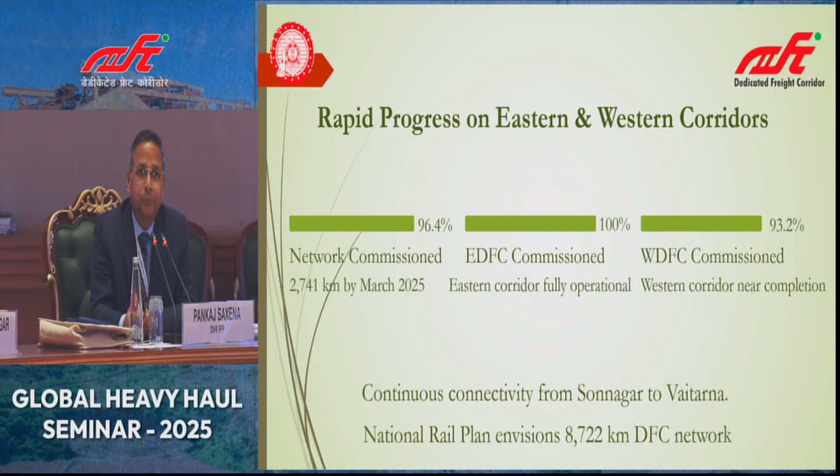This is about real-time monitoring. The entire network is being managed, monitored, and controlled from only two operation control centers. One is located in Prayagraj, in Uttar Pradesh, for the Eastern Corridor, and one is located in Ahmedabad, on the Western Corridor.

Normally the concept is that on Indian Railways we have a control office after every 300-400 kilometers in the divisional headquarters, and at times away from the divisional headquarters also in the same division. But here we have only 2 centers, which are fully equipped, most modern and state of the art. I would request all the delegates here, if they can find time for about 2-3 hours whenever they are in these places, or have a dedicated program for that, we can arrange a tour for these cities, and you will be happy to see all these facilities which have been created by us.

I will briefly say about the robustness of the system we have built. Our track is already fit for 25-ton axle load, the highest carrying capacity per wagon on Indian Railways as of now. But we have built our bridges and formation to the standard of 32.5-ton axle load. So the entire system is upgradable, and the design life we have taken for our structures is about 100 years. We have already laid our loop lines for 1500 meter length, so we can easily run our long haul trains in the loops without any major problem.

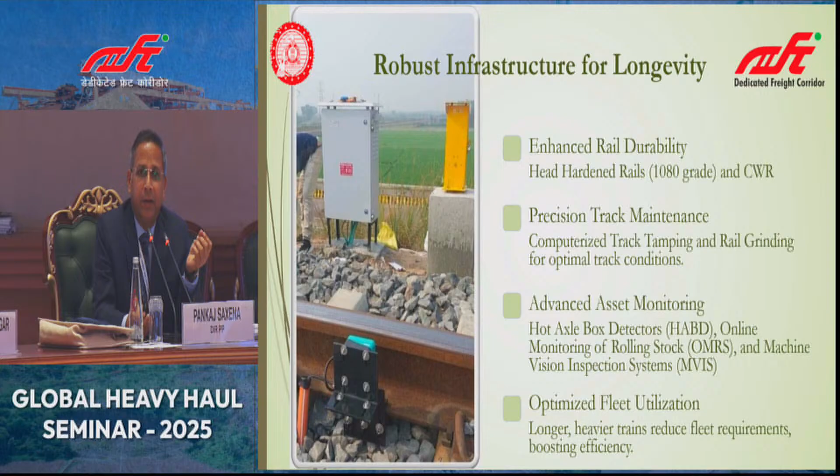These are our inline equipments which are helping us make our operation relatively safe. We have hot axle box detectors, OMRS, and MVIS - a totally indigenously developed product which we have already installed, and we are in the process of duplicating or multiplying it on our fleet. Not only on our fleet, it is also planned to be put on Indian Railways tracks by us.

I think I have already covered all these things. We are using all energy efficient items so that we are not dependent. One more major difference I feel is that our entire network is electrified - we are 100% electrified, even all our sidings, loop lines, and wherever we have connected with Indian Railways, they are all electrified. So our diesel oil or HSD oil consumption is very limited, almost nil.

This is about real-time monitoring. We have an integrated system with advanced signaling, detecting trains through different items, and controlling the entire operation through DFIS, Dedicated Freight Information System, which is our own indigenous product.

We have already changed the landscape of transportation in the country. We used to hear a lot about power shortages a few years back, but now we are catering to about 18 to 20 power plants through our eastern and partly western corridors. All plants have sufficient coal, and our transit time has reduced by about 30-35%.

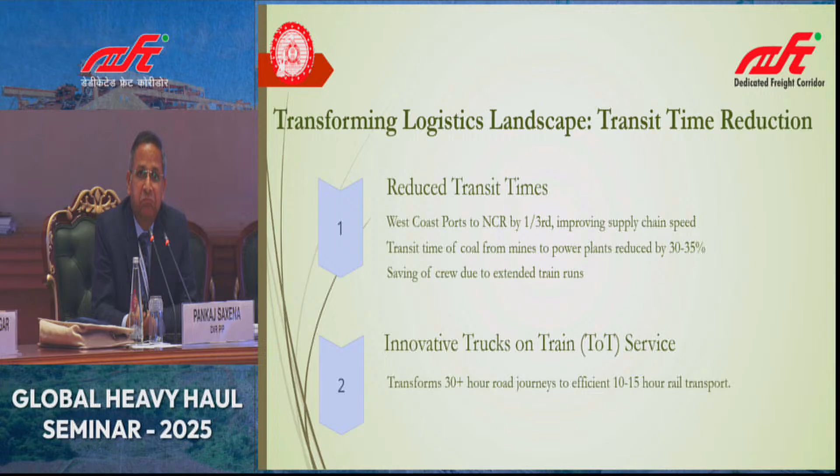Similar is the case in container transport time on the western corridor, which is mainly EXIM traffic, where we are cutting down the time by at least one third. This train is our signature scheme, bringing a lot of trucks through train to different places, directly impacting safety, saving fuel, and reducing congestion on the road.

I will not dwell upon this much as we have to limit our time. Now these are our environmental and social management framework items.

We have a comprehensive policy for these items and are assessing their impact. We have a very extensive ESIA, that is Social Impact Assessment Policy. Our management has recently approved a comprehensive corporate environmental and social framework network, which takes care of the entire operation and construction, covering what needs to be addressed at every stage during construction as well as maintenance of the sections.

These are some items we have already completed: we have put up a lot of noise barriers and adopted waste management policies. We have reused a lot of concrete infrastructure that was used for temporary works. We have planted many trees, done mangrove plantation, and have a dedicated Social and Environment Management Unit, SEMU, functioning for more than 15 years.

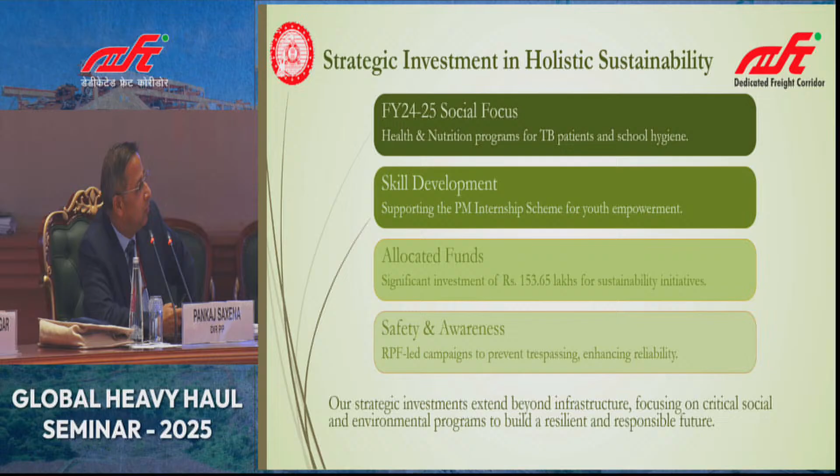Although not listed here, we have also been installing state-of-the-art medical equipment in one of our hospitals in Mumbai, which will benefit many people across the railway organization as well as other organizations.

These are our initiatives to reduce carbon footprint. Through electrification and other policies we have adopted, we are likely to save about 457 million tons of carbon dioxide over the next 30 years of operation. We are also planning to enter the carbon credit market, and I believe we have already addressed the issue of congestion to a great extent.

This is all about it, this is all about DFC. In fact, I would add finally that I purposely haven't included a lot of photographs in this presentation, because I want you all to visit these things physically and personally to appreciate them better. Through this forum, I would request all the delegates present here to make a plan for an inspection or visit to our DFCCIL facilities. I'm sure it's much better than what it looks here. Thank you.

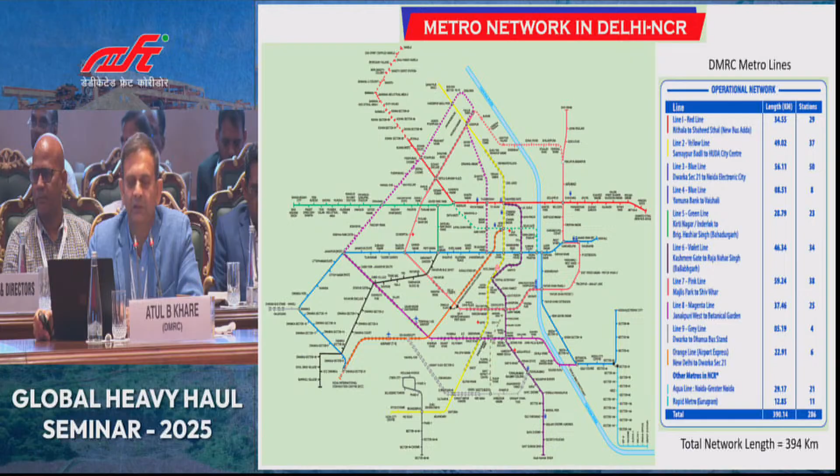So I'll be covering these points: the objective and methodology of the study, the wear behavior we have observed, the defect removal we have carried out, the natural wear rate which has reduced as a process during rail grinding, the profile conformity, and the use of rail grinding as a tool for noise and vibration control, and the way forward.

So the objective of this study, or of this paper, is to study rail behavior, to see the effectiveness of rail grinding in defect removal, and controlling noise, vibration, and profile conformity.

For this purpose, we have established test sites at different locations. These test sites are basically to monitor the surface condition, and we are carrying out dye penetration tests, and we are also measuring the profile with MiniProf instruments.

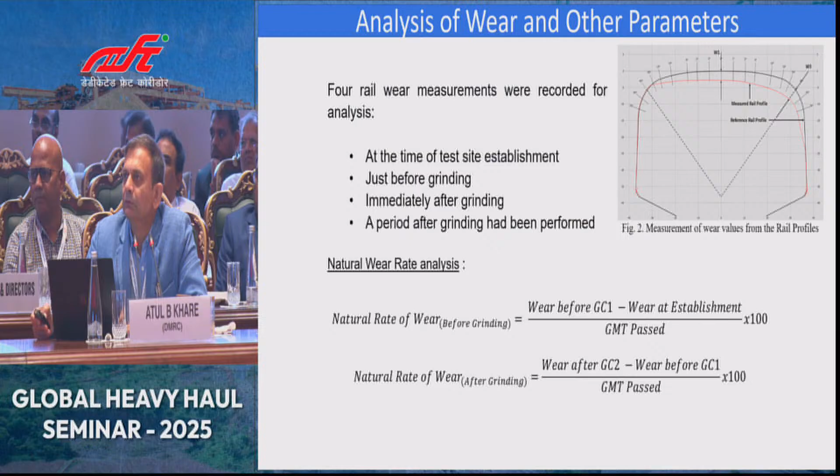So while measuring these profiles, over a... I think the order is not correct. Anyway, something has gone wrong with the presentation. I will cover it, not an issue - there's one slide missing in the presentation.

We have established test sites where we are measuring results before establishment of the test site, after the passage of grinding at the test site, and after some further passage, maybe about a year or maybe 6 months, at those test sites.

We have observed wear with respect to the MiniProf, and the wear observed at various test sites has been plotted. We will see there are - I am presenting 2 test sites on broad gauge and 2 test sites on standard gauge, and one of each is on a sharp curve and one is on straight tangent track.

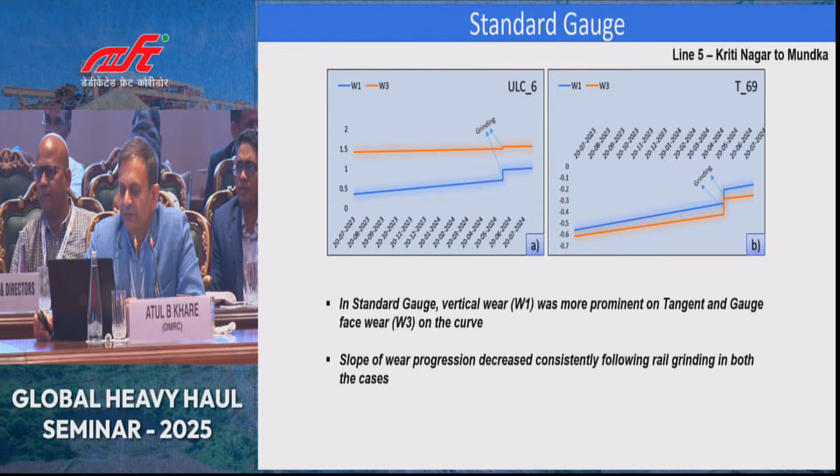These observations are very important: on curved sections, the wear is concentrated on the gauge face, which is attributable to flange contact, because in standard gauge the flange contact is continuous. But on tangent sections, the wear behavior differs between standard gauge and broad gauge - in standard gauge, vertical wear is more prominent, and in broad gauge, gauge face wear is more prominent.

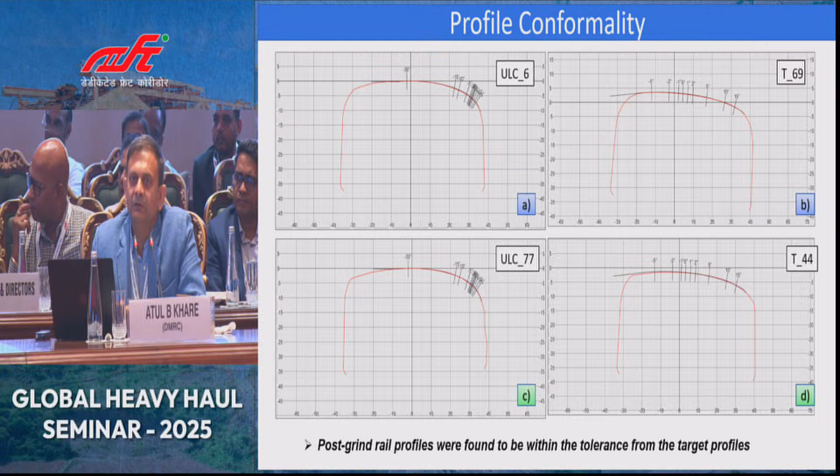This is with respect to profile conformity. What we are doing is measuring post-grinding profiles, and the profile observed by MiniProf is confirming the targeted profile. So we have experienced that the grinding is effective.

Although there is a considerable reduction in vibration by carrying out the grinding, this study needs further elaboration, and we need to redesign and further augment our profiling with respect to vibration control, so that it results not only in wear reduction but also in vibration mitigation.

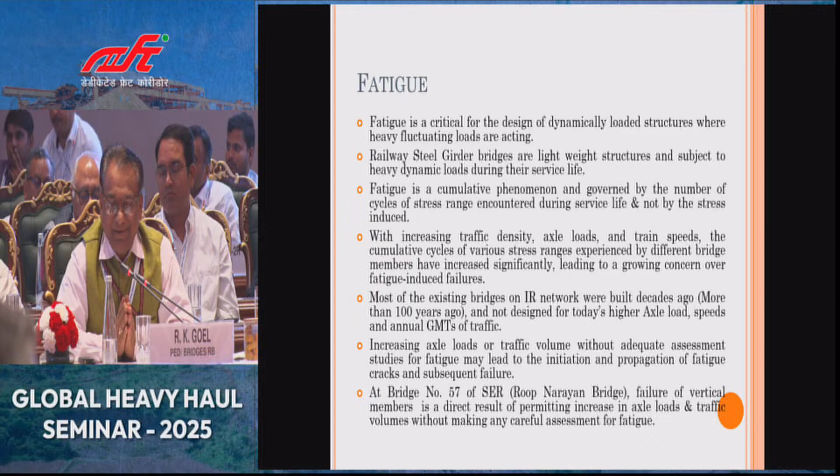We all know that track is very important, but the track has to be supported by structures like bridges also. And when we run heavy haul, it is not only the rail which takes the wear and the burden, it is also the bridges which are subjected to heavier loads as compared to normal loads. DFCCIL is basically new construction, but we are feeding traffic to DFCC routes, and we have DFCC routes where we have to run heavier axle loads on existing bridges. These old bridges, some of them built more than 100 years ago, were designed when axle loads were much less, to the extent of 18-ton axle loads, and now we are having axle loads up to 25 ton. So there is a concern of fatigue.

The way we are concerned about fatigue in rails, we take care of their testing, we do USFD testing, replace those rails, and there is a laid-down criteria of replacing rails after 800 GMT. But somehow similar kind of attention has not been given to bridges, particularly the steel girder bridges, which are to be designed and maintained with respect to the phenomena of fatigue.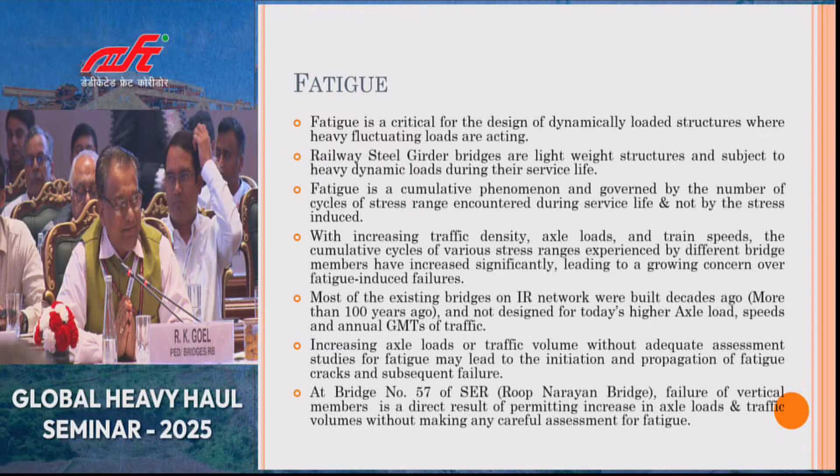So fatigue in bridges had been understood by engineers earlier, but its effects were taken into account by reducing the permissible stresses. Whereas in the 1980s, it was understood that this is not the correct way of taking fatigue into account. Fatigue is governed basically by the stress range that is imparted on the connections - not the absolute stress, but the stress ranges and their number of cycles that the components are subjected to in the service life, that is more important.

Efforts were made to revise the fatigue provisions, and finally in 2012, Indian Railway Steel Bridge Code got the modern provisions based on stress range concepts. But what about the existing bridges? They are to be assessed with respect to the new provisions. We had been doing this exercise, and this particular bridge failure, bridge number 57 in South Eastern Railway, has really awakened us to the realities, and we could validate our new codal provisions while analyzing this case study.

Our team, including Mr. Manish, Director RDSO, PED Infra RDSO, and myself, had been thoroughly investigating this case, and we tried to project this case study here in this forum so that everybody is aware about these new challenges coming up in the field of heavy haul transport.

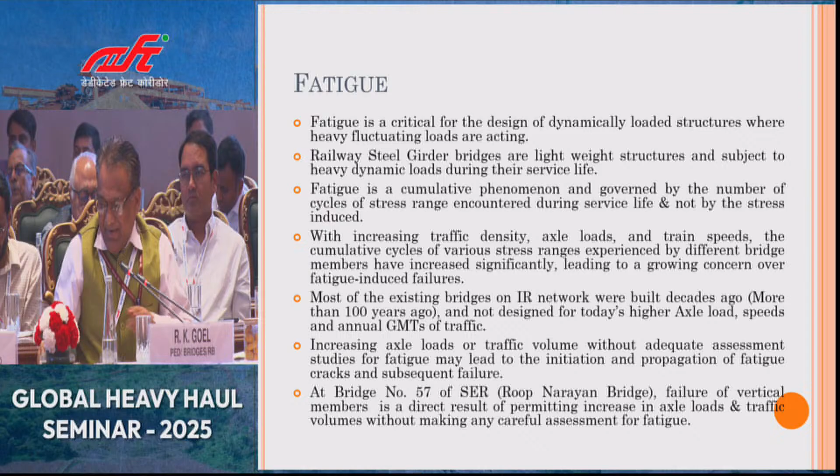So this is bridge number 57. You can see it is a very long bridge having 7 spans of 300 feet and 2 spans on either side, 100 feet underslung girders. It is situated between Kharagpur and Howrah. It is a DFC feeder route, having a GMT of about 80 to 85 annual GMT. It has got 3 lines. The down line is the one where this failure has occurred.

The middle line was constructed in 1928, and it still has the same girders which were provided originally. The down line was having the original girders from 1900, but they were replaced in 1966. The upline was constructed around the same year, 1966. So the girders of the upline and the girders of the downline, which was regirdered, were of the same vintage, about 60 years ago, when they were regirdered or built. So these are the details.

The important thing is the girders which were made in 1928 did not fail. The girders which were replaced in 1966 reported the failure. So this is an important revelation.

The design was done based on the BGML loading of 1941. At that time the stress ratio concept was there, and high-strength steel was used in the construction of these girders. Usually people go for high-strength steel to reduce the weight of the structure and to bring economy, but how much economy we have gained, that we will see now. This design was based on the old fatigue provisions by reducing the permissible stresses, which was not the right way of doing it. This is the member section, particularly the one you see at the top, the vertical, which has actually failed.

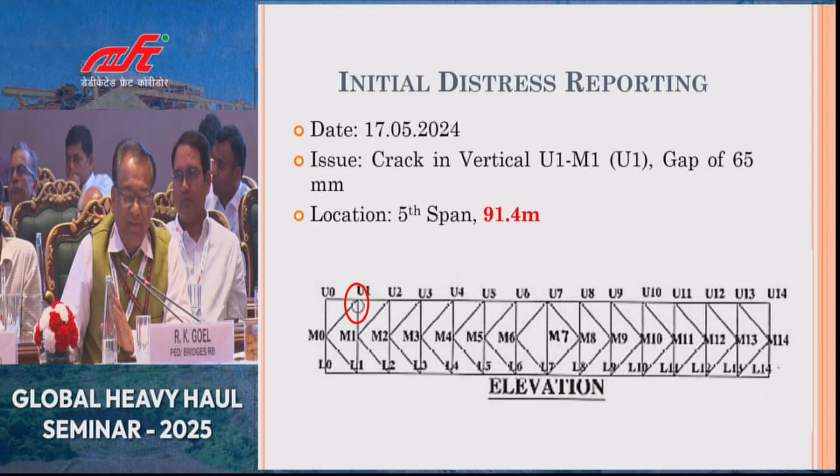This is the failure. You can see the complete failure, if I can have an indicator... pointer, can I have a pointer? No. Yeah, you can see this fracture. This gap was 65 mm when this fracture occurred.

This has caused the complete tying arrangement of the top boom with the rest of the girder to fail. This top boom, which is usually in compression, had an L upon R ratio which doubled after this fracture. So when the L upon R ratio doubled, this member was bound to buckle. So it buckled, and because of the high compressive stresses, these members distorted. With this distortion, the complete girder basically became dysfunctional.

And now it's a very important route, having a GMT of about 80. We had to sustain the traffic, so it was a big challenge to control this girder and somehow make the traffic operational on this.

After this failure, the site was visited by our experts, including the RDSO people, and initially we understood it to be a fatigue failure. Then we said, okay, if this is a fatigue failure, we must examine all other verticals in the rest of the other girders and in this girder also. So we did a thorough check of the rest of the verticals of the same span and the remaining 13 spans also of the same vintage.

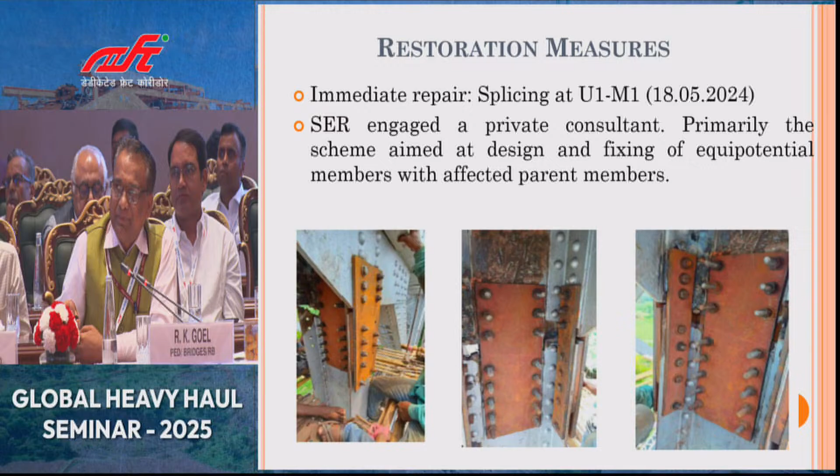So when we did the analysis of these failures, we found the girder was commissioned in 1966. The original design was per 1966 BGML loading; axle load had been raised from 22.32 tons to 22.9 ton at a speed of 40 kmph, and GMT was increased from 30 to 86.82. So basically, the members were subjected to larger stress ranges as compared to earlier, and more number of cycles because of increased GMT. That was the prime cause of this failure.

The vertical member, as I told you, was having tension, and it was highest in U1 M1. The same member failed, which was having the highest tension. High strength steel was used, which helped reduce the section of this vertical member. But the fatigue category specified in the Euro codes, which we have borrowed into our IRS codes also, does not depend upon the grade of steel. So even though the grade of steel was increased, taking a higher permissible stress in the design was not helpful. That's why we then restricted the use of higher grade steel by issuing a correction slip in our bridge rule, so that no more new bridges are built with higher strength steel causing subsequent failure at a later stage.

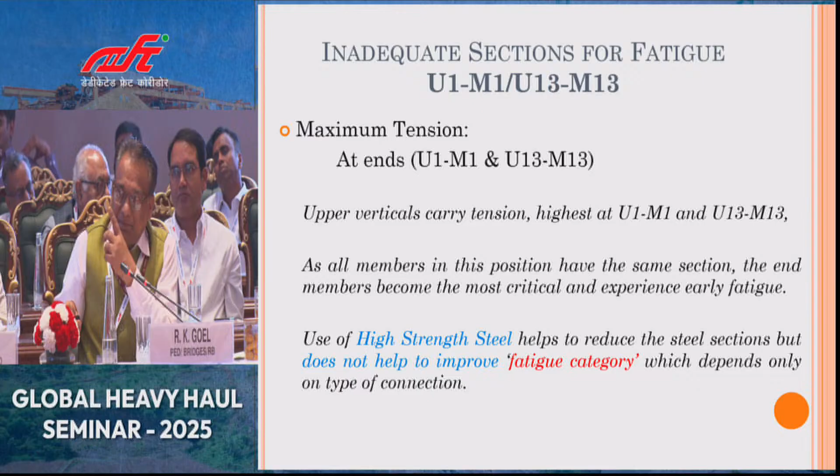So we did the reverse analysis to find out the actual residual fatigue life of this member. If we do reverse analysis using the present day codal provisions, taking a detailed category of 80, and if we take average GMT of 30, then the residual fatigue life of this member was coming out to be 9.3 years.

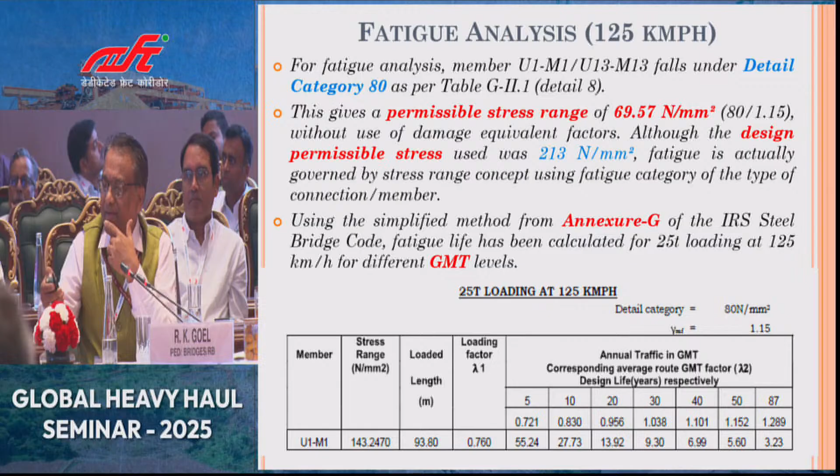But if we reduce the dynamic augment, instead of taking the speed of 125 kmph, if we take a speed of 60 kmph, this residual fatigue life figure gets increased. For this member, it gets increased to 12.18 years. Again, we have taken a detailed category of 80 MPa and a material partial factor of safety of 1.15. If we take this material factor of safety as 1, probably we can get more residual fatigue life.

For a speed of 40 kmph, this life further gets extended to 13.27 years. Again, this is for 30 GMT.

So these are finally the inferences drawn from this failure: lower dynamic loads are actually faced by this bridge as compared to the 25-ton loading which is actually running. And there were built-in redundancies which helped sustain this bridge for 60 years. Otherwise, it could have failed in 30 to 40 years.

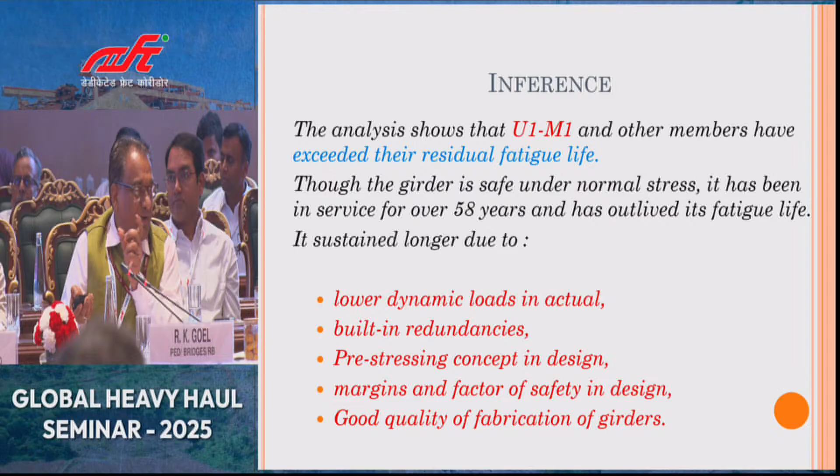And there's the pre-stressing concept in design. This is a very unique concept in our open web girder designs of RDSO, where we do the pre-stressing of the members. We provide a reverse kind of stressing in all members of the truss, so that theoretically they are neutralized at the time of actual loading, and we ignore their advantage. Then there are certain margins left, and certain factors of safety in design, which have helped this bridge to serve at least for this 60 years of actual life.

And then, good quality of fabrication. This girder was fabricated by BBJ, and the quality of construction was absolutely good. So seeing the quality of this fabrication, we could have probably taken the fatigue category 90 in the design.

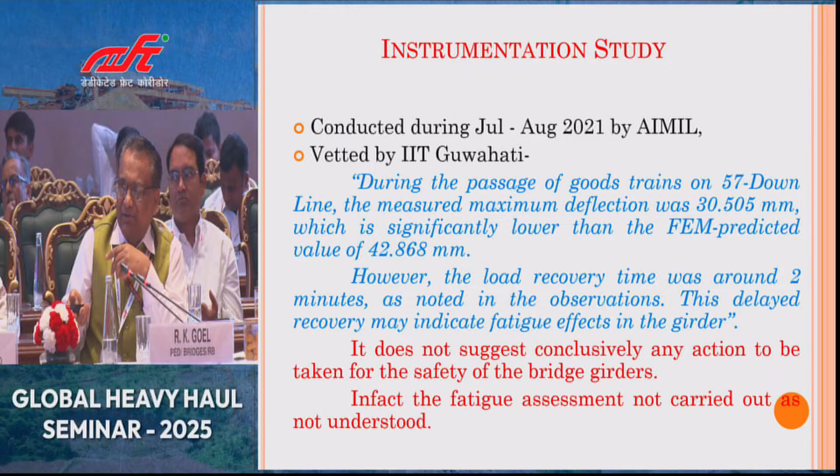This bridge was also instrumented by Messrs AIMIL, and IIT Guwahati has examined their report. Deflections observed were of the order of 30 mm, whereas they could have been 42 mm. That lesser deflection was probably due to redundancies in the structural arrangement. They mentioned fatigue but had not actually performed the fatigue analysis of this bridge, so their report did not draw any firm conclusion.

This bridge has been subjected to excessive GMT and cycles of increased stress ranges, and its fatigue life was consumed much earlier than the expected design life, because it was not designed with respect to modern concepts of fatigue design. A section, although safe per permissible stress consideration, was inadequate as per the latest provisions of fatigue assessment.

The recommendation is that residual fatigue life for old steel bridges more than 50 years old, with GMT more than 40, should be assessed to plan strengthening or regirdering based on distress condition and fatigue assessment results. We have already issued instructions in this regard from Railway Board in May and June 2024, and correction slips have been issued in the bridge manual for periodical assessment of old steel girder bridges with GMT more than 40 and age above 50 years.

Restrictions of loading, speed, or both shall be imposed as per these correction slips. This has been made part of the manual so that people do not face resistance from the operating department. Ultrasonic flaw detection, acoustic emission technique, and other oscillation measurements may be carried out for determining the proper scheme of instrumentation in consultation with RDSO.

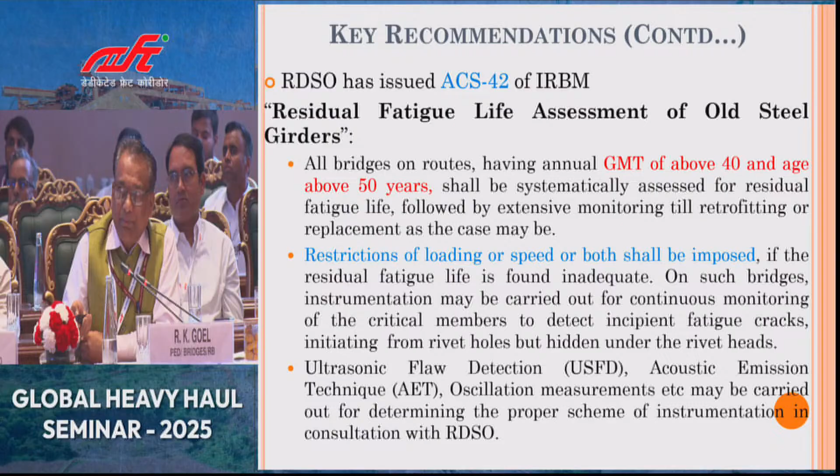A phased-wise assessment program has been suggested in the Indian Railway Bridge Manual. In phase 1, preliminary evaluation is done based on documents only, followed by detailed investigations refining parameters like GMT, actual GMT, and actual speed. All these parameters are to be assessed more realistically, followed by analysis.

If the structure is still found to have less residual fatigue life, we go for expert investigation, where instrumentation is done for a period of say 15 days to 1 month, representative of the year, to generate actual time histories and stress range histograms, working out the detailed fatigue assessment of different members and the residual fatigue life.

Even if the structure is not found safe, phase 4 involves taking remedial measures, such as planning for replacement, intensifying monitoring, and imposing all kinds of restrictions, sustaining the bridge somehow until the new bridge comes up. This is the approach for residual fatigue life.

Fatigue control options, I have already told you about. Instrumentation monitoring guidelines have been issued by RDSO, which are to be followed. We are also looking at a technology called Alternate Current Field Measurement, ACFM technology, wherein one can detect an imminent fatigue crack emanating from the rivet hole without removing the paint from the connection. We are trying to develop vendors for this technology. Once that is done, we would be in a better position to assess the health of all members found fatigue critical.